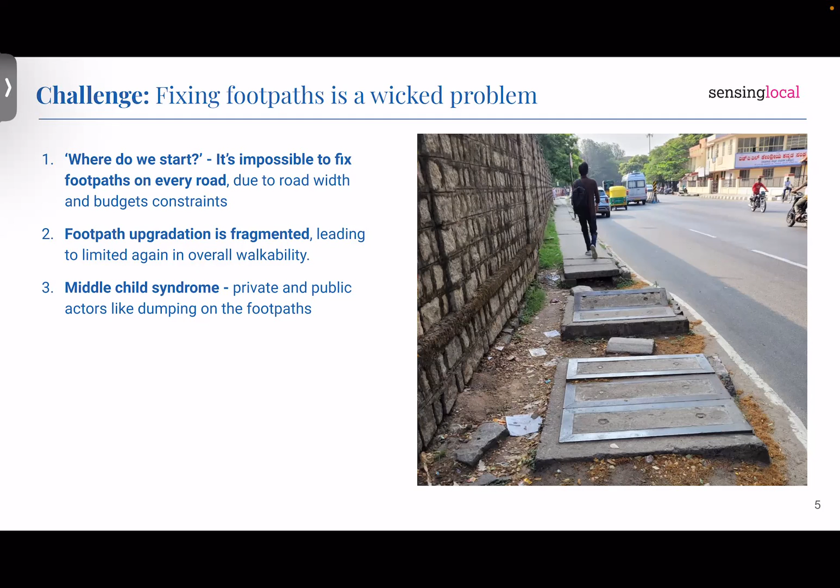So it inevitably isn't anybody's responsibility in that aspect, even though it is public infrastructure.

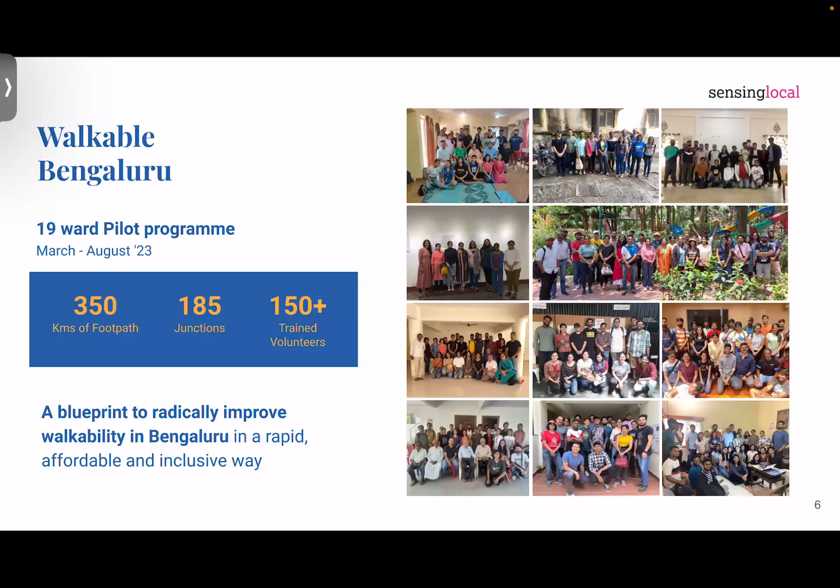Walkable Bengaluru was actually a pilot program. The reason we pushed this forward is that we wanted to cover at least 19 to 20 wards roughly. It was completely community driven, and we did these audits every weekend with a whole set of volunteers. We covered around 350 kilometers of footpaths, 185 junctions, and around 150 plus volunteers who were trained to do the audits. From there we got a very interesting blueprint on how walkability can be achieved, and that's what I will take you guys through.

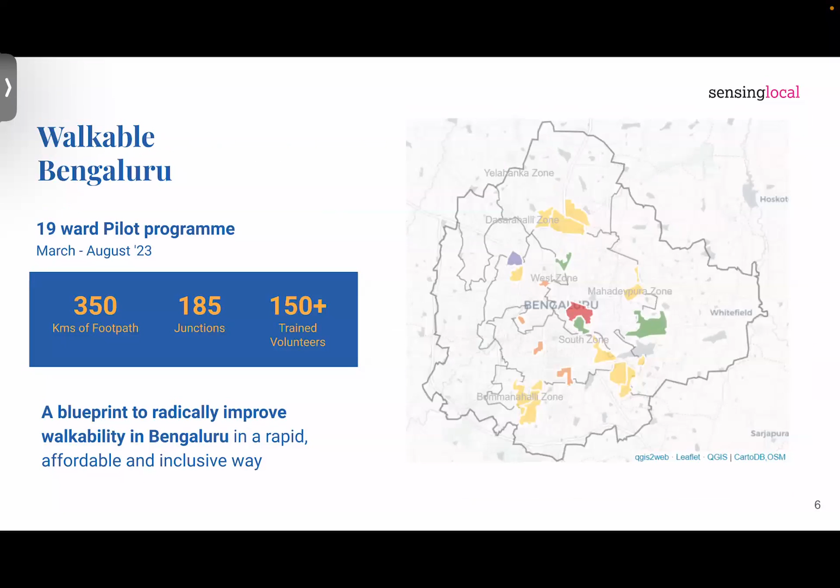So this was roughly the distribution of the wards. We took a combination of commercial, residential, inner wards, outer wards, and we also looked at industrial wards. So there was a good sample set that we looked into, to see if there was anything underlying in all of these wards together.

Our components of this audit followed a strategic approach. We first identified what we call a priority walking network, which means that if a ward has 30 kilometers, we're saying don't fix all 30. Most people will be using maybe 15 kilometers out of that for walking, so we'll focus on that 15. And even in that 15, probably a percentage will already be in good condition that we don't have to touch. But the one that's in bad condition is what we want to go and audit.

We also did comprehensive audits. We looked at a simple form, but covering multiple parameters, which also provides high accuracy and high ownership of a particular issue that we are capturing.

We also then use this data to generate budgets. We did budgets according to the SOR, our schedule of rates here in Bangalore. So immediately after I collect the data, it goes through our tool, and then it gives you the budget on how much money is required to solve for, or improve, that particular footpath.

The final thing we did is we used this data to create local projects. So whether we look at pedestrian streets or public space development along the way, all of these are things that we looked at in terms of local projects.

The key factors of this particular study: it took around 4 hours for one ward to do the audit and generate the budget. It was usable by citizen volunteers and government officials alike. And what we have is ready for planning - basically the data is ready for planning and budgeting.

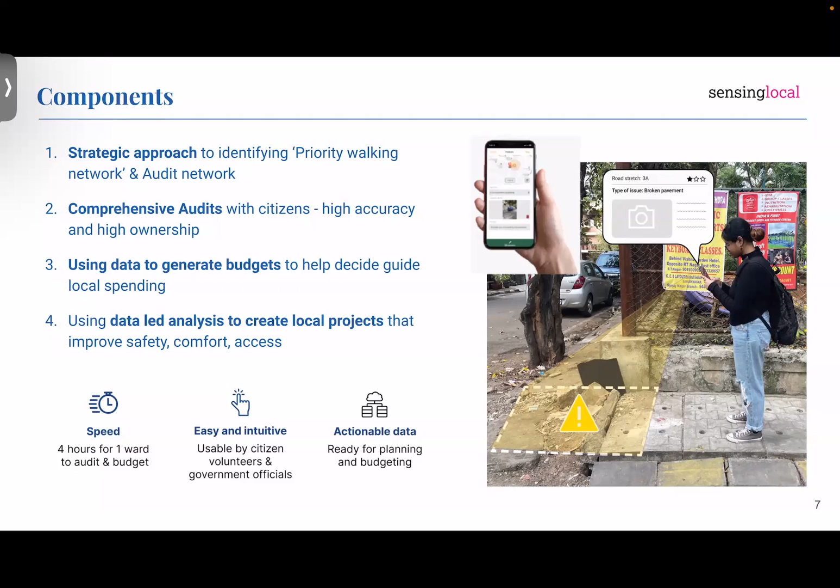So this is an example of one of the wards, where 26% of the road network that exists in this particular ward is the priority walking network, of which we audited just 15%, which we thought were in bad condition.

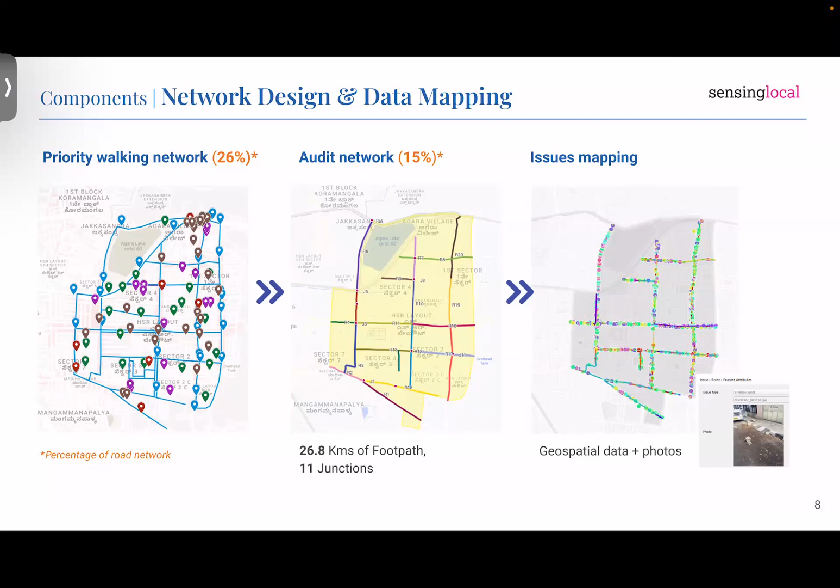And then we go about mapping these issues - to every point that was collected, point or line, there was an image mapped to it, as well as a few attributes. The issues we collected range from footpath quality, waste, encroachment, obstruction, unsafe areas, and junctions as well. We had 7 parameters we looked at: infrastructure, and on-ground experience of safety. So overarchingly, we had multiple parameters that we looked at.

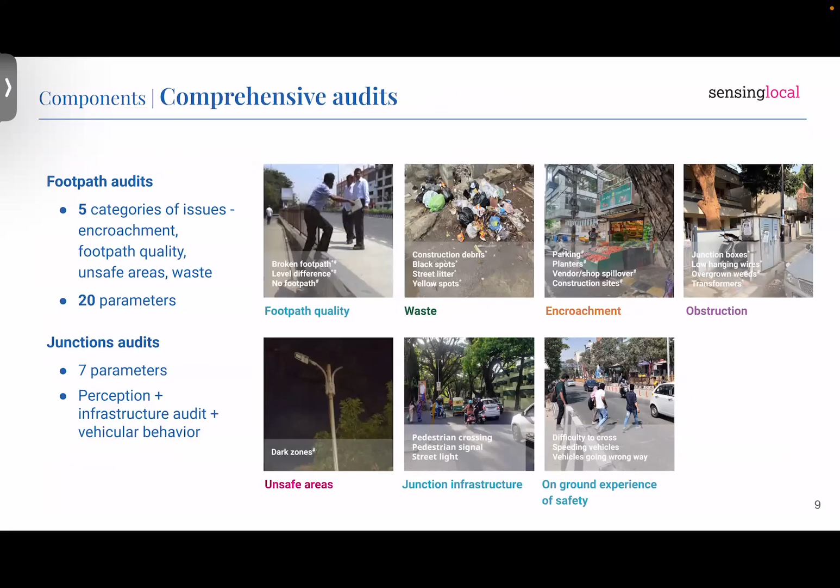And one of those - what we're talking about - is a deep dive into encroachment, and from within encroachment into parking. That's what we'll be focusing on in today's discussion.

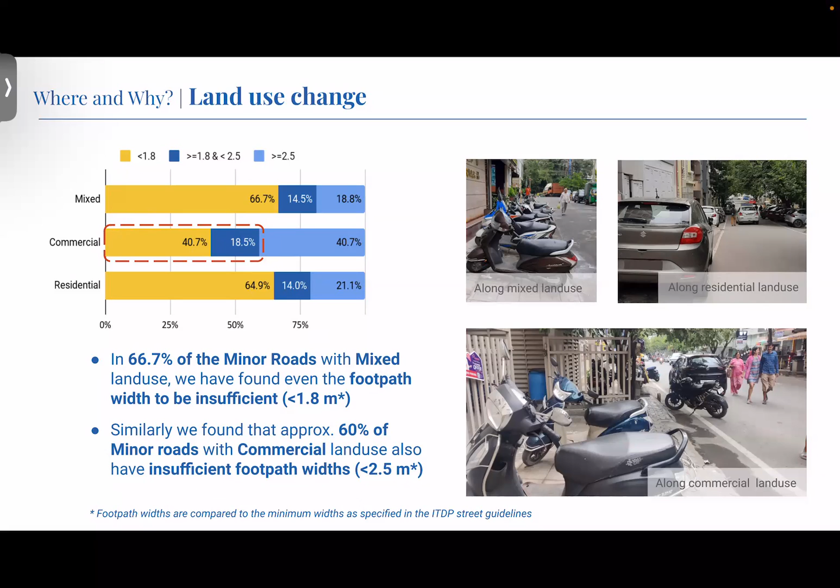In commercial areas, the norm we work with is 2.5 meters. In commercial areas too, we notice that 60% of roads with commercial land use within minor roads also have insufficient footpath width - they don't even have that 2.5 meter width. So we are already struggling, in a fight between pedestrian infrastructure and parking infrastructure. But the land use does attract a lot of these activities, which actually needs parking to be there.

The next deep dive we did is we looked at multiple trip attractors and the component of temporal parking. We realized that a lot of the encroachment from parking is because of religious institutions, educational institutions, and obviously commercial activity that exists.

At this moment, I'd like to bring attention to religious and educational institutions. The reason is that in both, we find minor roads form a very large category, but the important aspect is that both parking and footfall are temporary and time sensitive.

So the moment it's school timing, it becomes a chock-a-block area, or it's a particular timing for a festival, or temple timing, or prayer timing for the mosque - it definitely becomes clogged up. This is something we've noticed as well.

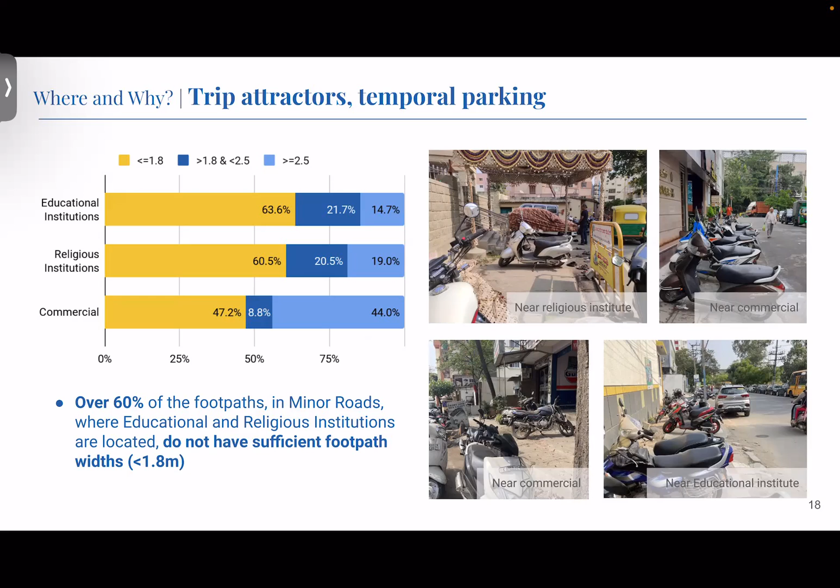So what results when you have certain kinds of trip attractors, again majority on minor roads, is that 60% of footpaths in these minor roads do not have sufficient footpath width - not even within the 1.8 meter width that we require for the footpath. These images are indicative of exactly that.

I'll leave us with these questions and let it dwell on what we're thinking about. As we go into the presentations, I think this is to the speakers - if there's some correlation already there, it would be great if you could point it out, but we'll discuss these at the end of the presentations.

So one of the first questions we're trying to place and investigate is that a lot of roads that attract parking are linked to trip attractors, largely located on minor roads with insufficient width. In such cases, how does one negotiate parking? The second is when reorganization of space does occur on a particular street, especially when you come into area level parking plans...

How does pedestrian infrastructure weigh in terms of priority to allocating space for parking? Is it evaluated? Is it not considered? Is it ignored? Is it taken into your total calculation, saying okay, I will readjust pedestrian infrastructure and then go about doing the rest?

How can temporal parking be addressed? That's another question our data has thrown out.

And finally, and I think this comes more from a Bangalore perspective, because we do not have a master plan - city mobility plans to some extent, but they don't cover parking entirely - so what then becomes the role of a parking policy?

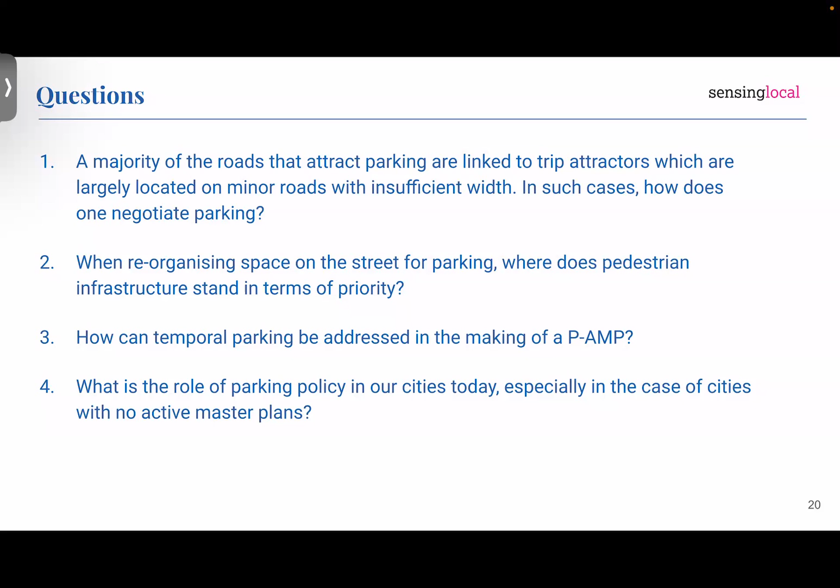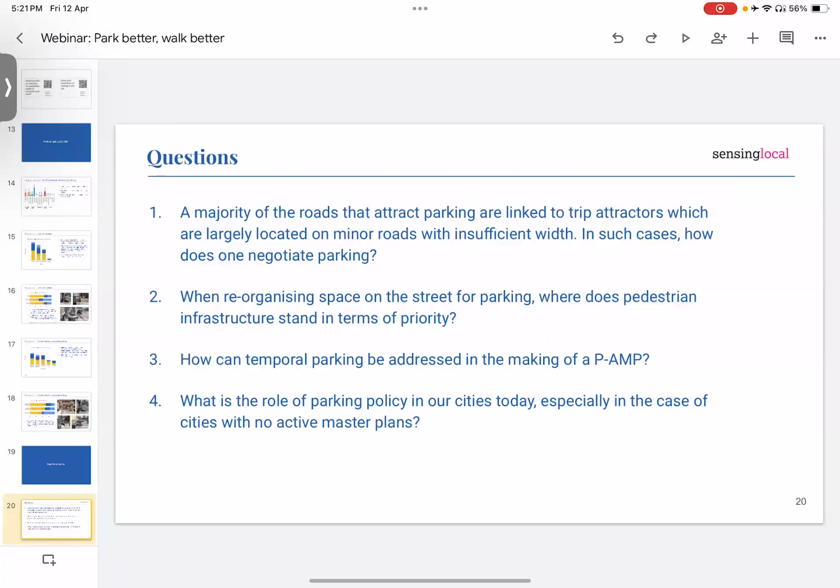So I would bring in our first presentation. And just for us all to understand, the way we've lined up these presentations is that we will first look at Urban Lab, because it's largely around parking policy, master plans, and how you look at it from the top-down perspective.

The Racecourse Neighbourhood Coimbatore is a project led by the government, really pushing to be able to do an exercise like this at an area level. What is being covered by CSE and Sonal is looking at a community-driven approach towards area level parking management plans. So the structuring also comes from a perspective of scale and who's leading and deriving this.

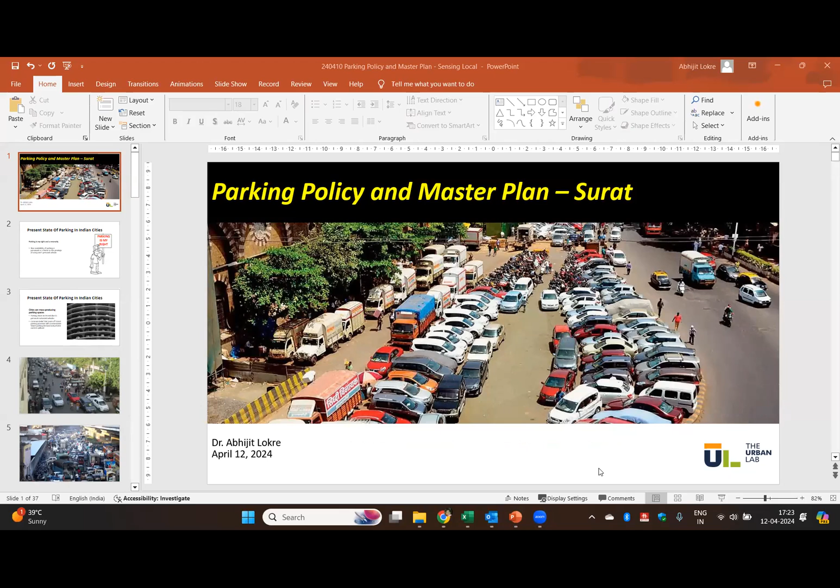We can see your screen, no? Yeah, even in the presentation mode, we were able to see it. Okay, so am I visible and am I audible? Both - yes, you're visible very much and audible both.

So yeah, thanks for inviting me first of all. And I think it was a very interesting perspective you brought on Bangalore. It got me thinking actually, because I've never thought of parking and relating it directly to master plans. That's a new perspective for me.

And I was thinking, even as you presented, whether really a city with a master plan - let's forget a good and bad master plan, but a city with a master plan - does it have better parking practices? Or does it have better parking practices that lead to better walkability? I thought about it and figured out not really. I know Bangalore is really suffering in its planning because of how planning happens. I do some work in Bangalore and I know how bad planning is.

How new roads are carved out, how land uses come up has absolutely no logical basis. I come from Gujarat, where development plans are prepared every 10 years, and there are town planning schemes at level 2. Gujarat actually promotes a lot of mixed land use, but the parking problem is as bad as Bangalore. It still exists, I don't see any difference.

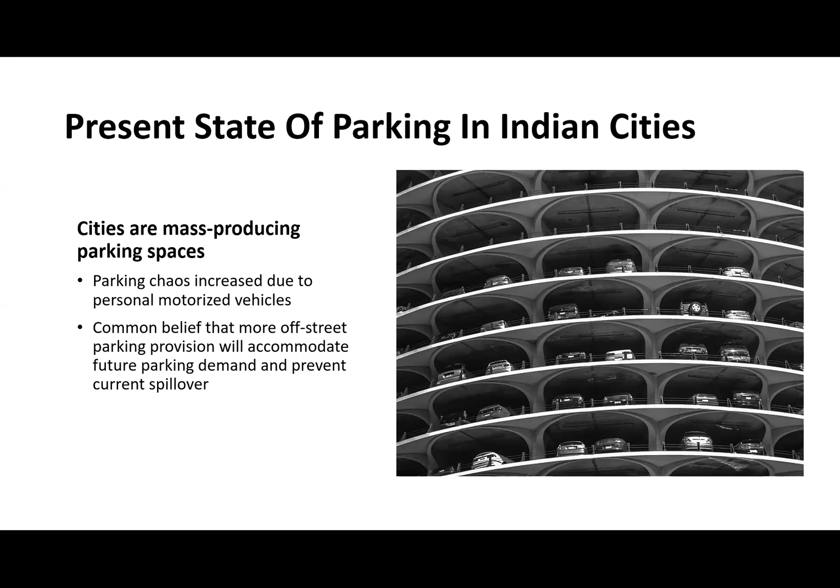Surat actually has a lot of parking provided by the municipal corporation. They also have 11 multi-level car parks, which are managed quite well by Surat and built quite well. But still, the Surat Municipal Corporation believes it's their duty to provide parking. In fact, in 2016, when we were asked to prepare the parking policy, the corporation's belief was that we should tell them how much more parking they need to provide — what the gap is in supply and demand, so they could start providing more.

We had done some studies comparing Indian cities, looking at the percentage of habitable place where people stay versus parking area. In Indian cities, we provide a lot of parking, and this comes through parking minimums. The development control regulations say you have to provide at least so much parking, you cannot provide anything less than that. And the parking minimums have been rising every time the development plan gets revised.

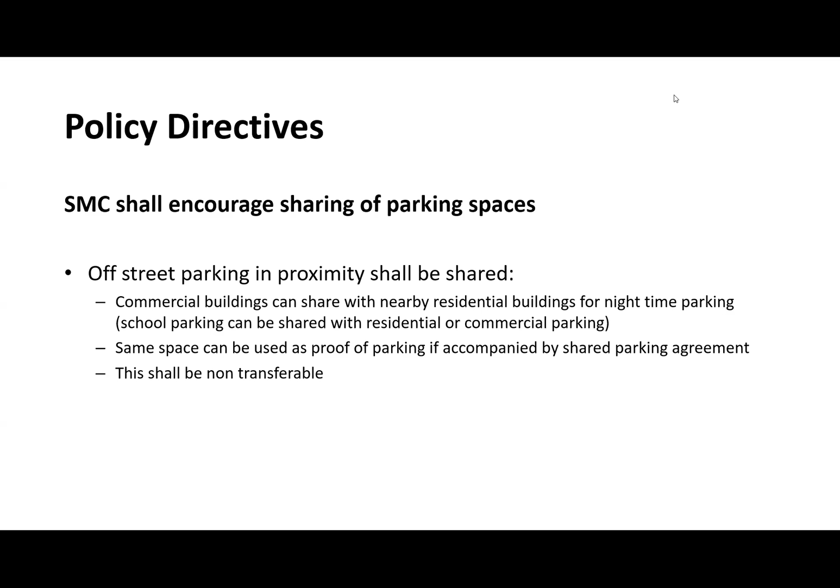Parking permits was something that also came up, where you carved up Surat Municipal Corporation into parking districts, where you could purchase parking permits either for 6 months or annually. These were offered at subsidized rates compared to the hourly parking rates.

Another innovation, very strongly recommended by the municipal commissioner in Surat: can you link your insurance premiums to parking violations? So if you violate any parking policy directive, your premium will be increased. Again, this has not happened because they would have had to negotiate with insurance companies about this. So it remains as a directive in the policy, but not really implemented. But I believe this is something that can be looked at.

Now, Surat has a master plan, which you were talking about earlier, but I don't think the master plan actually had any influence on whether parking is better or not, or what is happening around parking, because I think parking is linked to many other factors—for example, the availability of public transport, the parking charges themselves, and any other transport demand management measures.

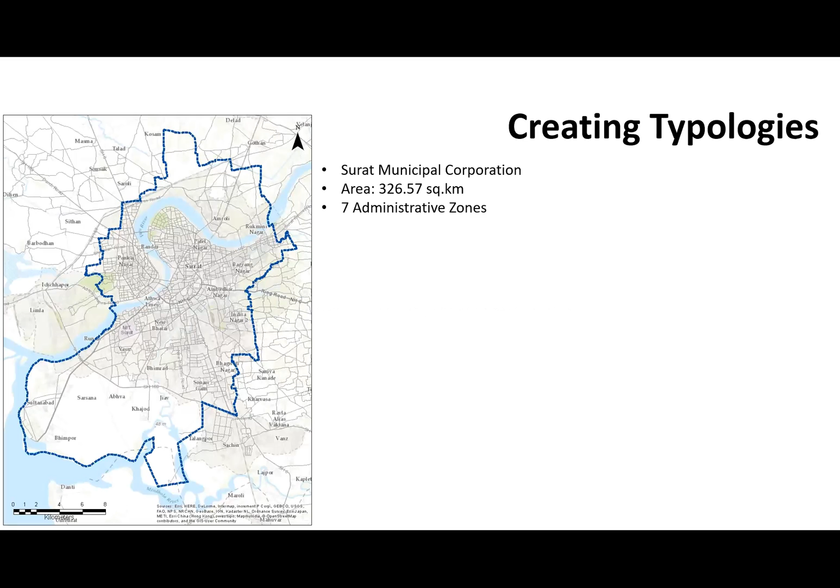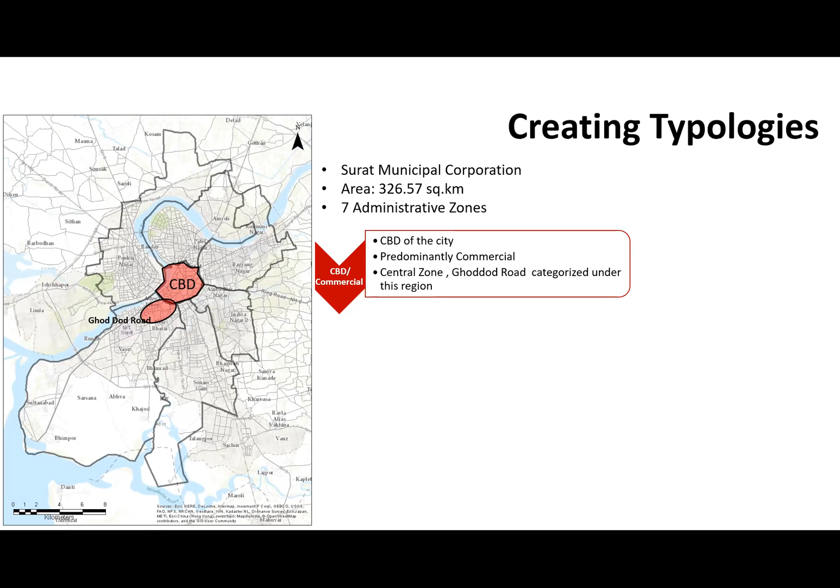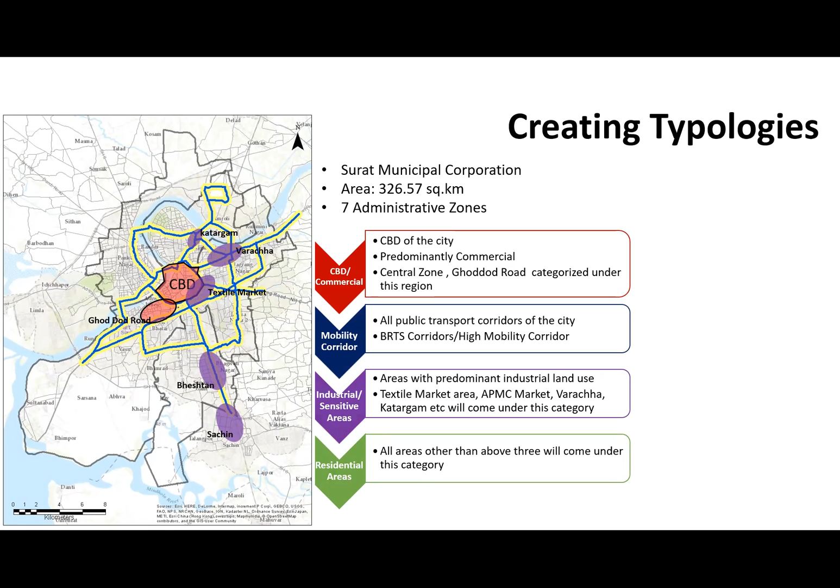What Surat Municipal Corporation was very clear about was that they wanted a parking master plan done by consultants. What the consultants, UMTC, came out with at that time was not a very comprehensive master plan—they said okay, we'll divide up the city into some areas. There is a CBD, the old city of Surat in the center, and a certain road that takes off from the CBD called Ghod Dod Road, so that becomes part of the CBD. Then all the BRT corridors and high mobility corridors come under the mobility corridor. Then you have industrial areas, and everything else came under residential areas.

So that is how the master plan for parking was done, with these 4 clear areas. For each area, there were very clear-cut strategies. For example, for the high mobility corridor around the railway station, there was some basic counting and surveys done to understand the supply, and based on that the gap was found, with some suggestions given for what the supply could be. This was not a very detailed master plan, and it did not really work in Surat.

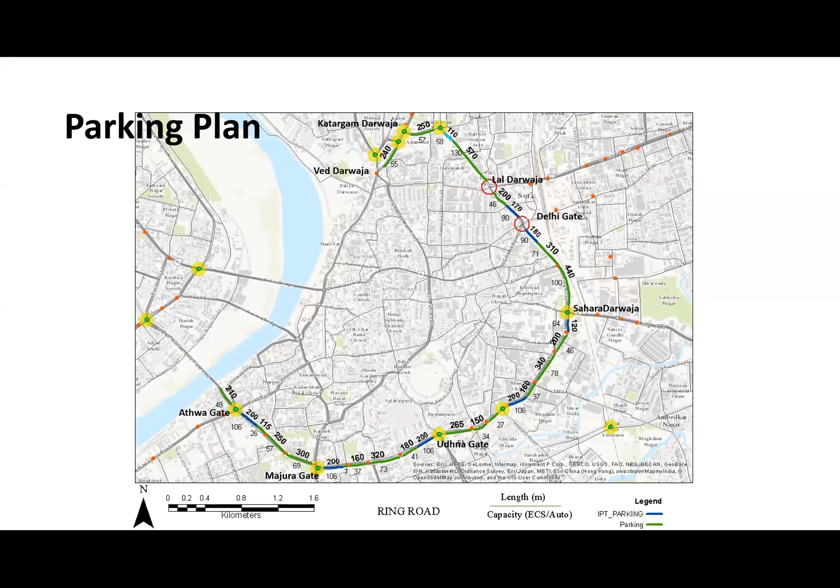I was fortunate enough to work over the next 2-3 years—I think in 2018 and 19, I worked with CEPT University on preparing a master plan for Bhubaneswar. I think Sonal's presentation will also talk about area master plans, so I'll skim through this quickly. What was very important in Bhubaneswar was how they linked the area master plan to the plans and policies—it started with the comprehensive development plan, linked to the draft parking policy, and under that they came up with their area master plan.

What needs to be done when you do a master plan? You need to figure out what is the supply infrastructure, what is the demand, what are the current practices, how is it enforced, what is the NMT and pedestrian infrastructure—very critical, especially given today's context about walkability—and who is going to enforce the institutional aspect.

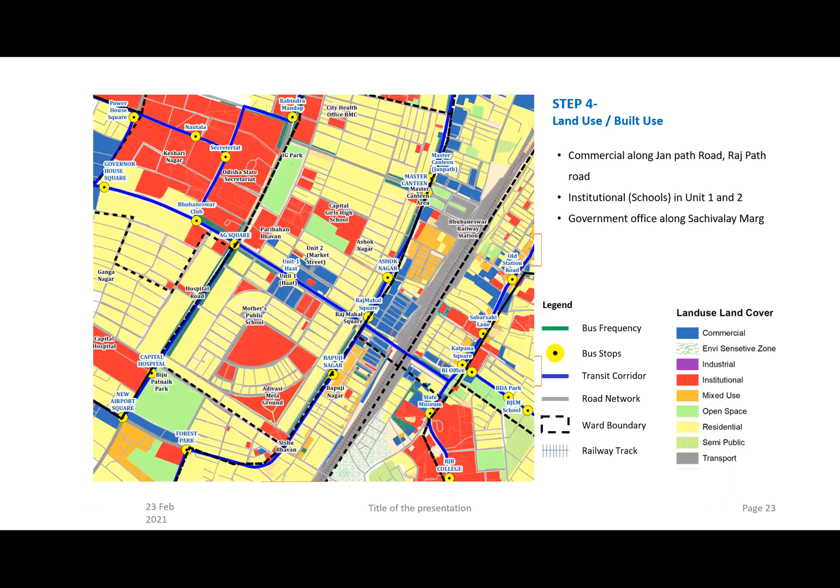So a few slides quickly on how do you demarcate areas, how do you actually proceed. This is a small insight into what Bhubaneswar did; the actual work is much larger than this. You find out what is the transit network, look at the land use, and then come up with your area boundary.

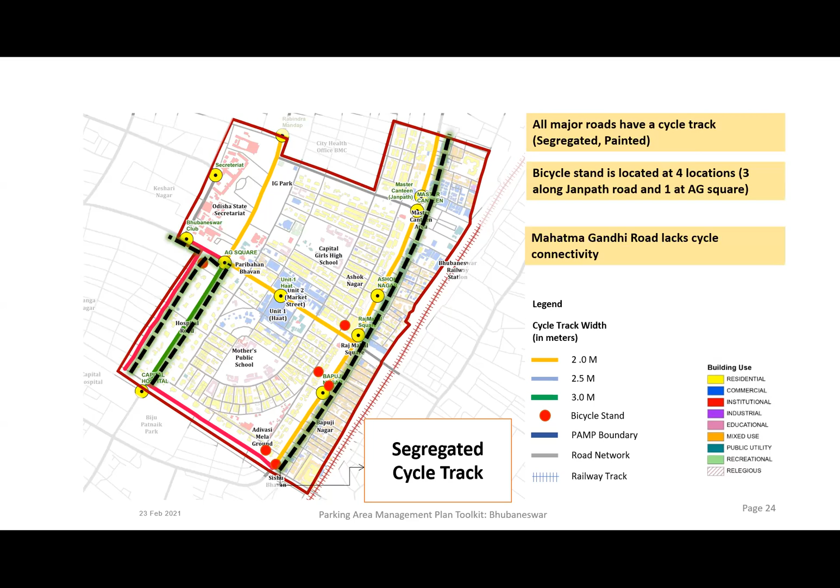Based on that, you look at your bus routes, your cycle routes, where are the segregated cycle tracks coming, where are the markets coming. This is all baseline analysis that needs to be done. Where are the public bicycle stands located? Where are the parking lots located?

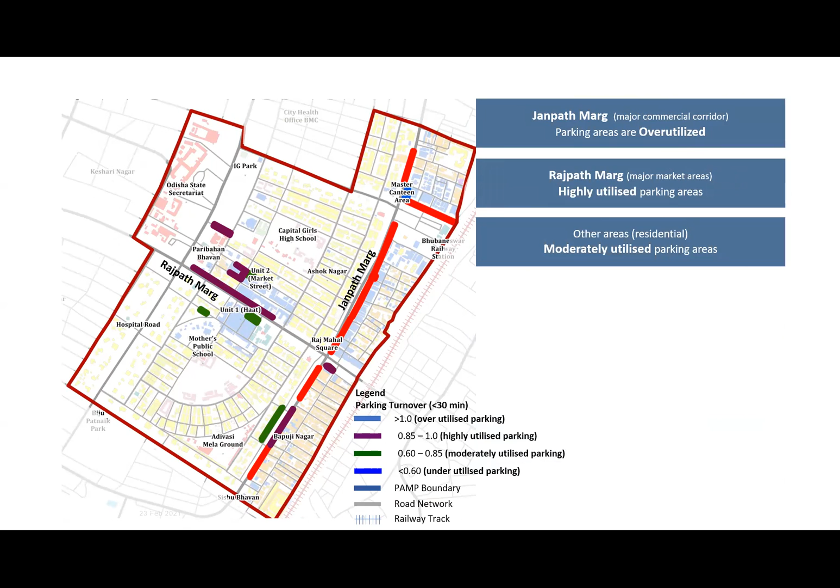You do all this baseline work, and a lot of surveys to understand the parking turnover, the utilization, the index, and so on. You figure out which areas are overutilized, which are underutilized, which are utilized only during certain times of the day, and so on. You also find out what is the average parking duration.

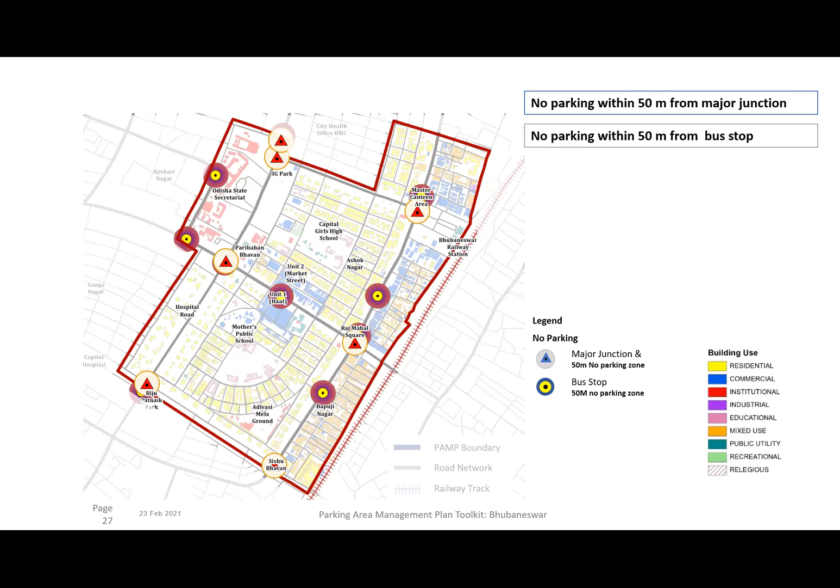And then you come out with certain strategies. You say, okay, no parking within 50 meters from major junctions. So you mark that out: 50 meters from transit, 200 meters from any existing multi-level car parking.

Then, because there may be certain administrative reasons, no parking on the Sachivalay and Rajpath Road. You identify where you can pay and park with high charges, because these are transit corridors, and where parking is permitted near schools and colleges. It certainly helped that Bhubaneswar has a very clear master plan.

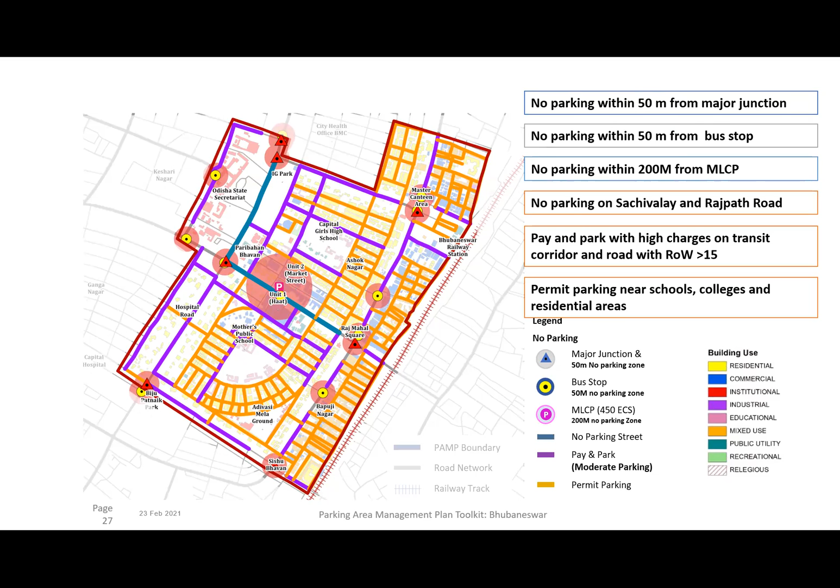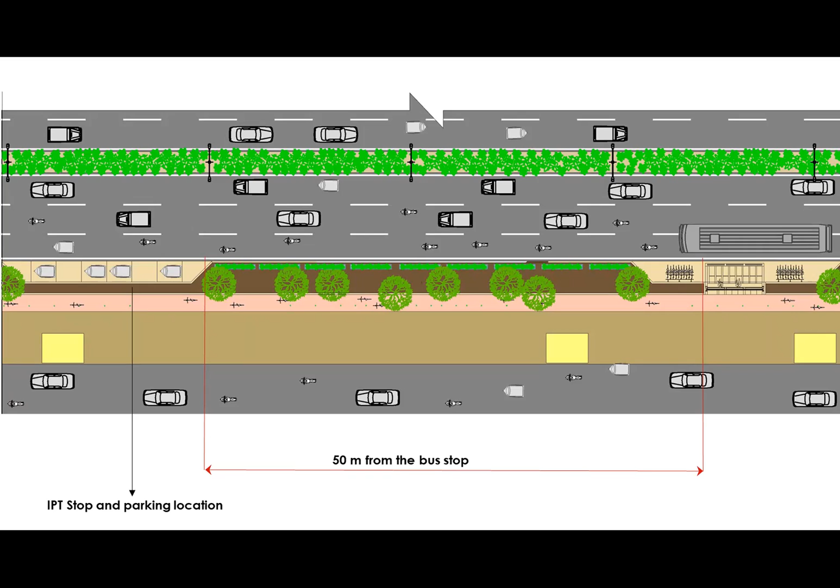And then you get down into details like this: how should the design be, where is the cycle track, how much is the footpath, and so on. So at the end, you come out with templates like this for each and every street in the master plan area, and you develop sections for each one of them.

This is what Bhubaneswar did for two pilot areas initially. One was what I had shared, the other was near an institutional area. Then they looked at how to fund this through municipal budgets, through councillors, through public-private partnerships, through creation of an urban transport fund, and who would be responsible. They had proposed a UMTA, but it's still not there.

The municipal corporation was responsible for implementation. The BDA was responsible for guidelines. The smart city was responsible for providing technology solutions, and enforcement went with the traffic police.

I'll end with a few insights from some other work we had done in Surat a couple of years back, and this is where it comes to behavior. Somehow in parking, we are very reluctant to target behavior and use parking prices to do so. We had done some other work with Urban Works Institute on seeing how parking itself can become a private business, and as part of that work, we had done some surveys.

What we found is that when the rate per hour for cars becomes 40 rupees per hour, you still have 55% of people willing to pay that. As the rate goes up to 80 rupees per hour, you still have 38% willing to pay. You can look at it in two ways.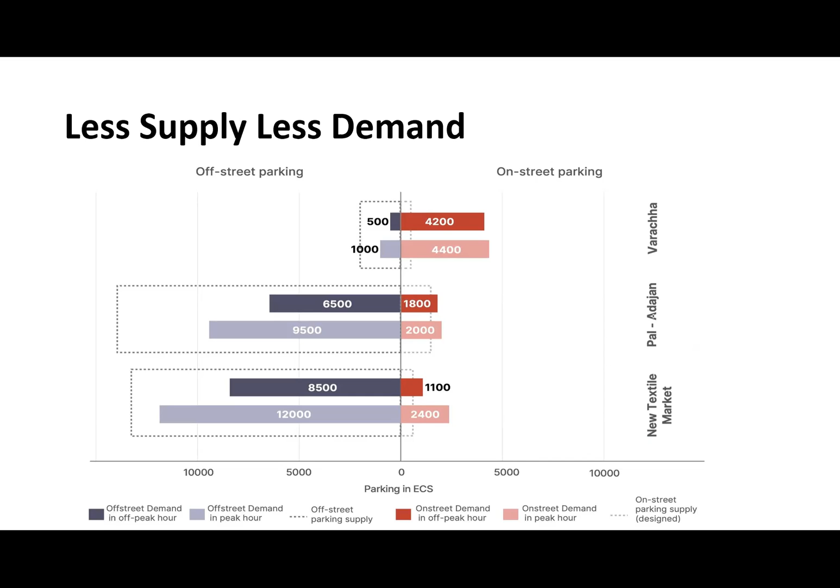If you look at Pal Adajan and new textile market, you will see that as the supply has increased, the demand has also increased. So there is a direct correlation between these two. Somehow we believe that increasing supply will be able to manage the demand. It doesn't work. Increasing the supply also starts increasing the demand, because parking supply is like a magnet. It creates its own demand. That is something that came out very clearly. Less supply, less demand, more supply, more demand.

And the last one, we looked at what is the willingness to pay in areas with limited parking. So in Varachha and new textile market, where parking was very limited, people are willing to pay more, which means there is a substantial market for private enterprise to get into the business of providing parking.

This is something that was done as part of research for Shakti Foundation. I believe the report will be out soon. It's an interesting study which you could look at. I'll end with this.

So if we see the parking challenges in Indian cities, we heard many points from Mr. Abhijit. One point I would like to start with is that parking, when we see it, it's not about the space, it's not about the management. The first thing we have to connect is that it has a strong relation with travel behavior, because he mentioned it as a socioeconomic activity. Yes, because the first question you think is, do we get a parking space over there? Then I take a car. So it is very much strongly correlated with the travel behavior. And city to city, we can see this variation as the land use changes, as the socioeconomic factors change. This travel behavior and its strong correlation with parking keeps on changing. This is one thing we should keep in mind. And what we see in Indian cities, especially today's core issue, is about linking parking and walking.

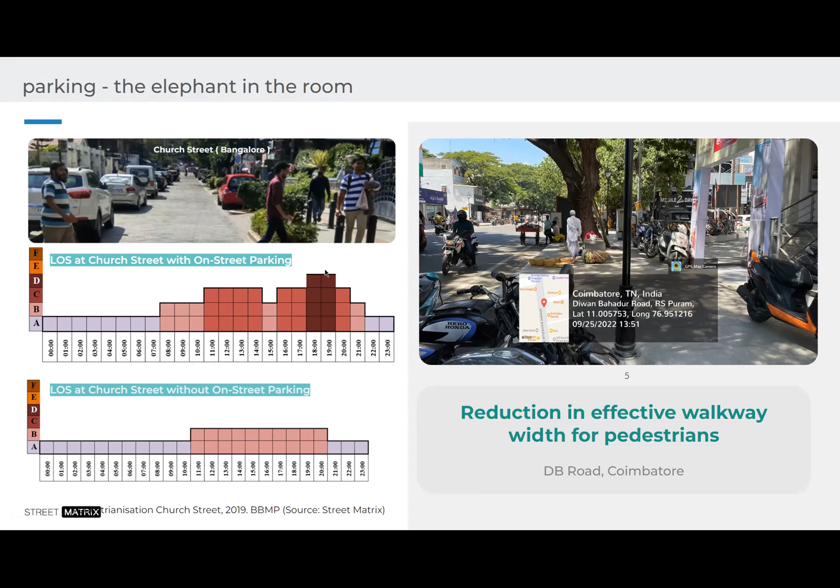We have done some research to understand how serious this parking issue is for infrastructure. The two charts show one with on-street parking and one without. We can see it going from level of service B up to level of service C and D. So parking is the one element literally reducing the service level, and that makes people come out with protest and demand space for walking.

So how do we solve it? We have seen different approaches, a couple of points which Mr. Abhijit already mentioned, but I'm just compiling it. As he said, the conventional approach is wherever there's more demand, providing supply there, the conventional way of considering multi-level car parking.

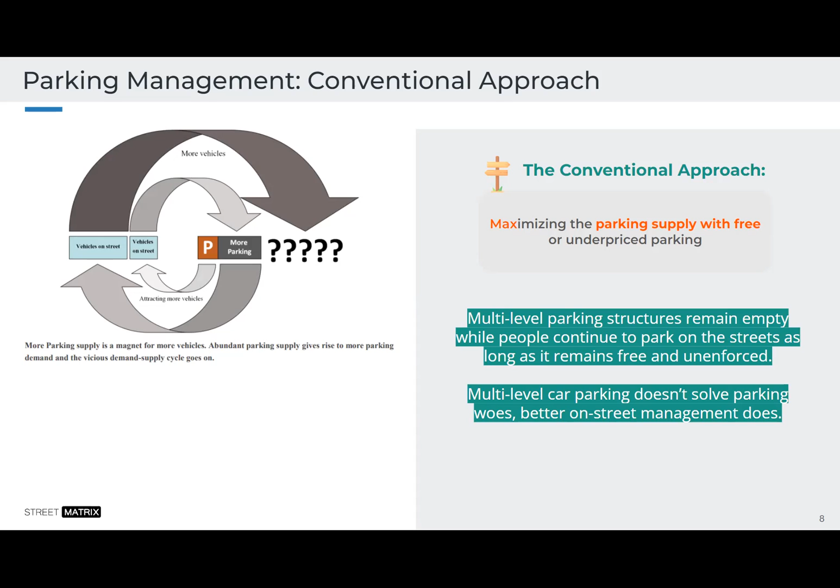That is not the right way of doing parking management, because we have seen even in MLCP how efficient it is, how much occupancy it has. You won't even believe it when we surveyed a couple of multi-level car parkings in Coimbatore city, the parking occupancy was seen quite low, as low as 10 to 15%.

That is with this huge infrastructure cost, and finally its operations stand out as a problem. We have another approach recently incorporated into street design templates, where parking is taken as one of the street design parameters. But the question is, are we actually understanding this street element of parking as a space, or in terms of its activity behavior? What we observed is that most of the time parking plans have been retrofitted into design templates, not integrated into mobility plans.

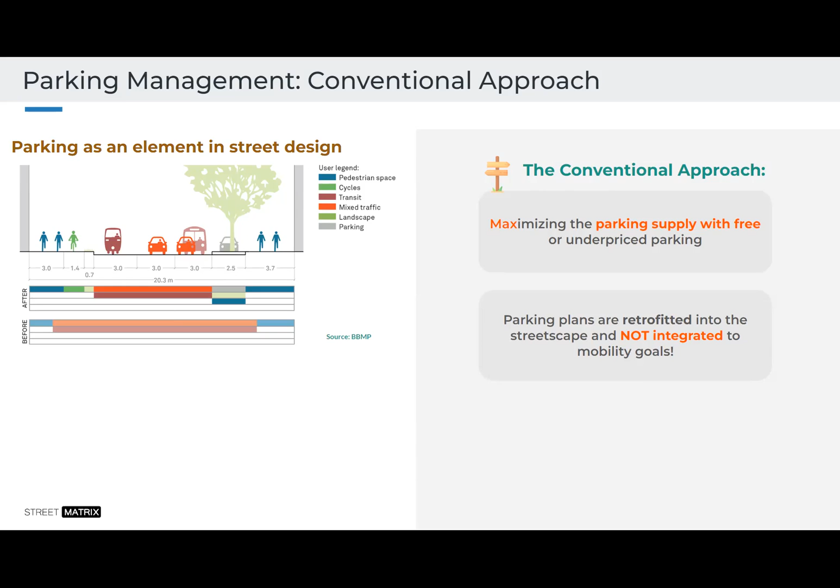So what do I mean by this? I have more evidence from Bangalore to showcase it, because I've been working with these street design templates for quite a long time. I'm showing you one of the street designs from Bangalore.

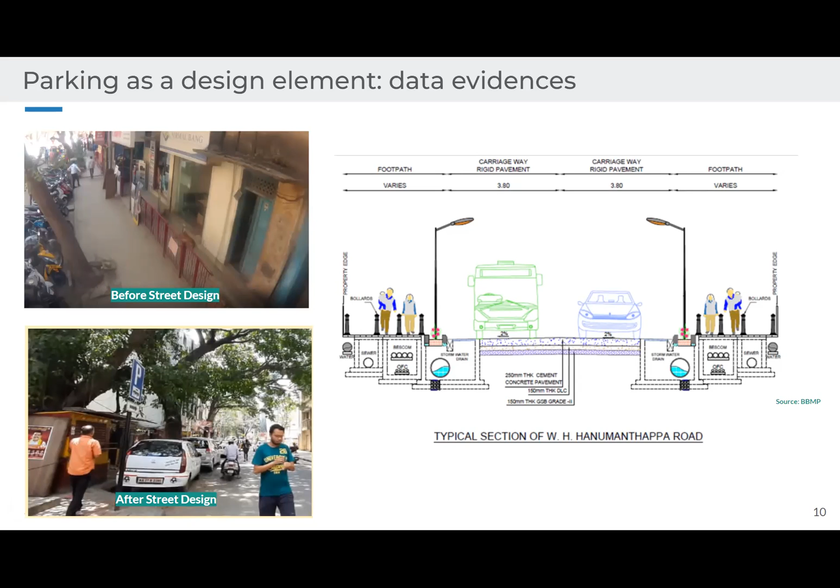Before the street design, you can see the sidewalk, and a series of parking. But even after the street design, if you look at the parking bay, you can actually see the constraint in the walkway space kept for pedestrians. It's not just about treating parking as a bay to be provided of 2.5 meter width. This is more of a design practice that's been followed, but that doesn't even ensure good walking comfort and walkability.

In the particular case shown here, without that street design, you can see how much the street was utilized in terms of vehicles, two-wheelers and cars, a large number for one day. That was reduced a lot, in fact by 70 to 80%, when the redesign was done. But again, the utilization or management of the space was still a problem occurring.

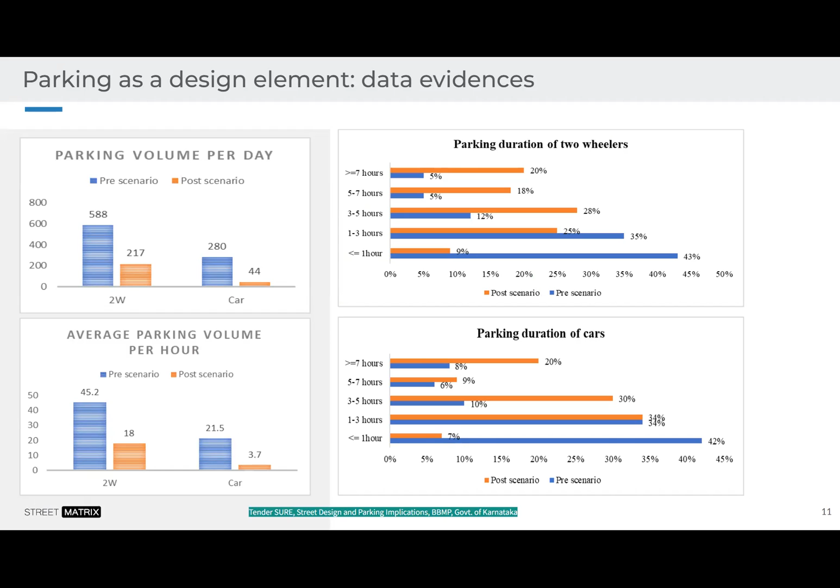Again, the lack of right design, not understanding the parking requirements for the area, and neglecting even the pedestrian walkways and space was another concern. And this is still the problem cities are facing now.

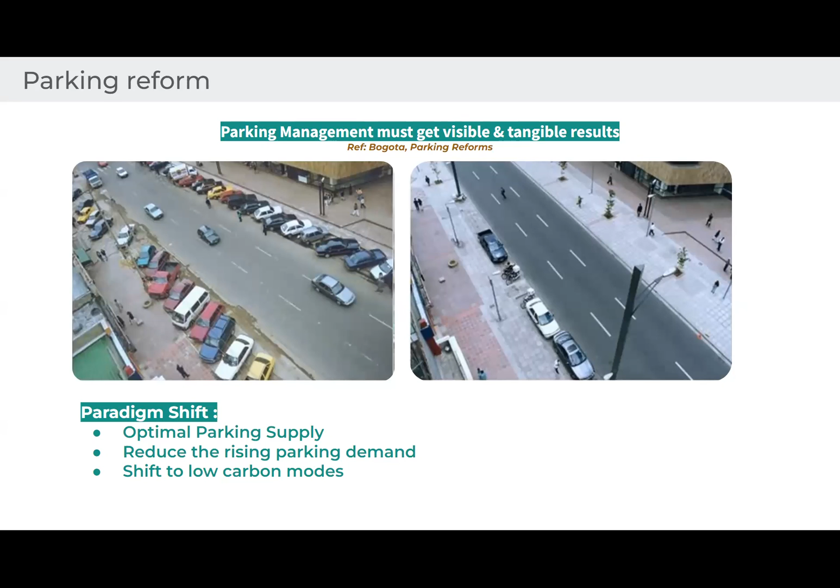Now we have examples from global practices which tell us how the reforms have to be taken care of. It's not the conventional practices that really help us solve it, but we should go ahead with parking reform. Our ultimate goal should be a paradigm shift where cities don't increase supply, but optimize parking supply and reduce demand. These are things we should look at to address this problem, and finally shift towards public transport or low carbon modes.

That's all I would like to say on that.

What cities are practicing now is seeing the ultimate aim as behavioral change towards sustainable modes. Moving from on-street to off-street parking is the agenda for us. How we do parking management to achieve this agenda is the steps we have to think about. Keeping the basic principles: provide on-street parking, but price that space, and even keep prices higher than off-street parking. Always understand the dynamics of demand, monitor it, and slowly nudge behavior to shift to public off-street parking. This is the stage in which we have to work.

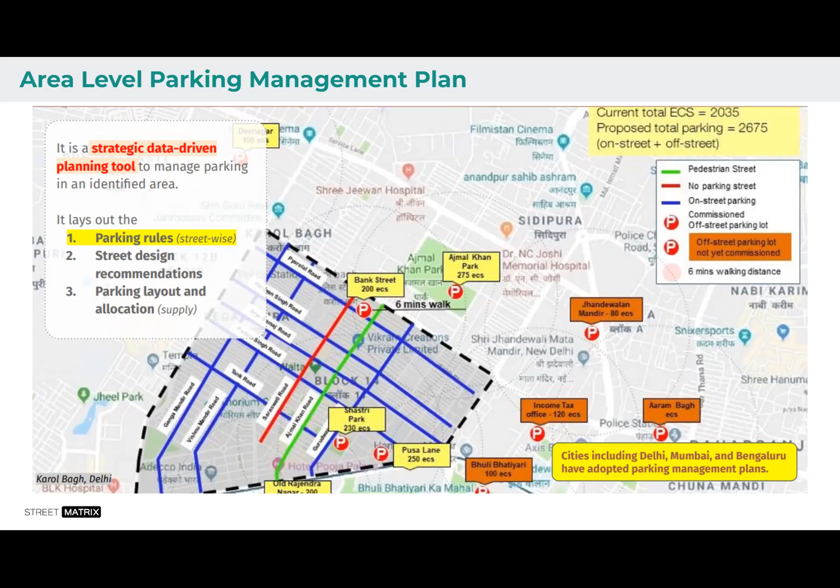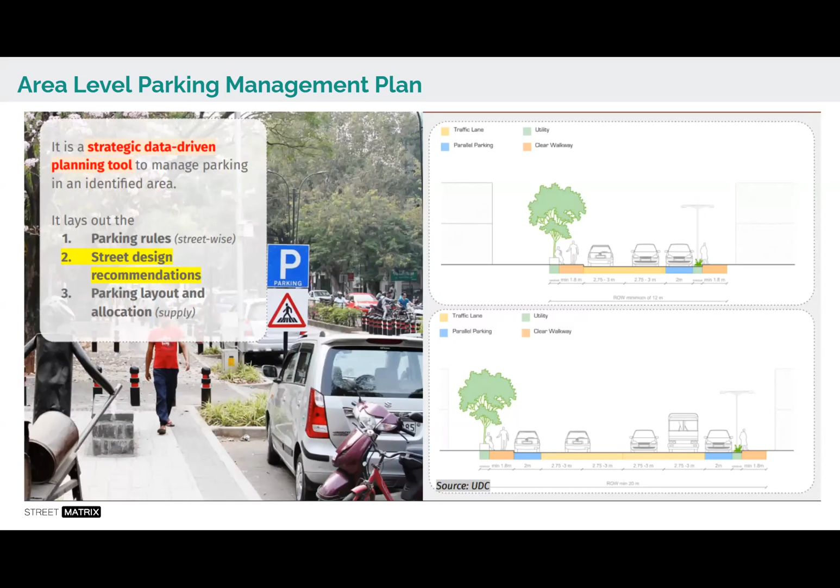In your area, not all streets have the same demand, or demand for the same things, or the capability of accommodating parking. So identifying the street hierarchy, establishing it with mobility in mind, determining where parking can be given and where it should not, these are the baselines which help narrow down a plan to effectively accommodate and utilize the space. This is the core of the area management plan.

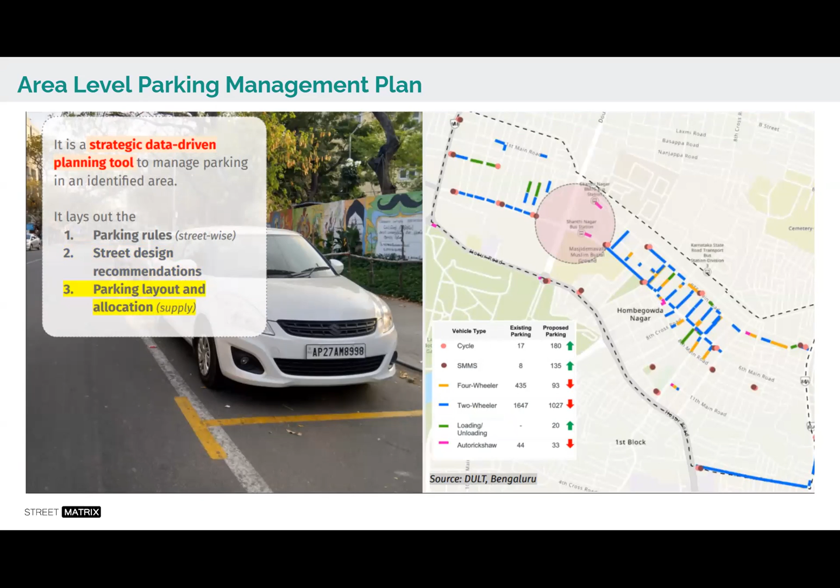I'm showing you one area plan where we can see how it works as integrated mobility. It's not just for two-wheelers or cars; we have cycle stands, shared mobility, auto rickshaw, and loading-unloading zones. All these are important activities for a resident or neighborhood. Understanding that neighborhood is the base on which area level plans are built.

This is a data-driven decision-making tool where parking rules and definitions come out, and then we move forward with implementation.

So here I'm going to show the parking management action plan for the Coimbatore neighborhood. The city officials of Coimbatore.

Reashma, just checking on time. So you can wrap it up in 5 minutes, is that possible? Yeah, sure.

Okay, done. So here I took more time explaining the baseline, because that's the approach in which an area parking management action plan has been working on.

So when we met the officials in Coimbatore, they had this issue of wanting to address parking in two of the neighborhoods, taking up the area-level parking management action plan. One of the roads given to us was Racecourse, that is the first one. You can see it, Racecourse is a beautifully built-up area which has prioritized walking and cycling.

When you see these photographs, you can see how good this space is. But in reality, the space has turned into this kind of situation, even affecting the walking.

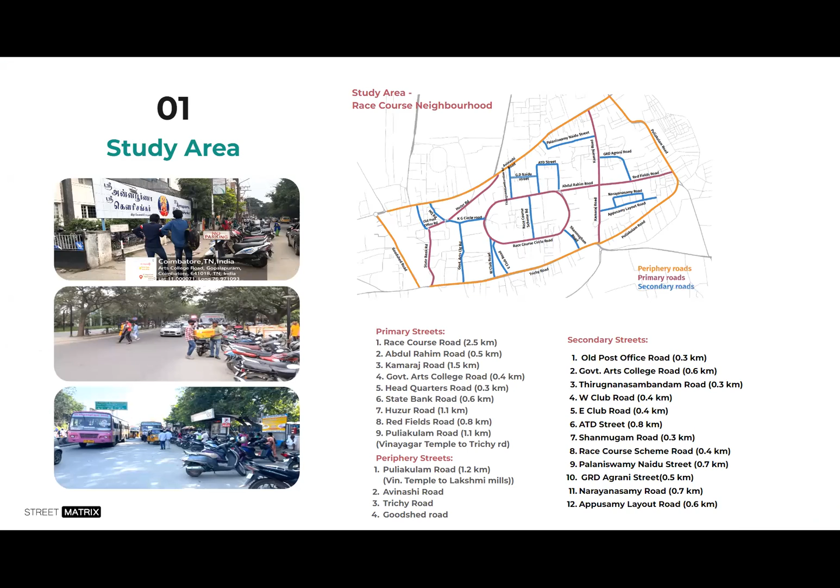Affecting more crossing of people, movement of vehicles, just because of the haphazard parking. So our approach was the same as what I explained so far. We identified the street network, we had a review of the entire area. You can see how the vehicle ownership, as the city has seen increase, has affected this kind of issue, parking chaos.

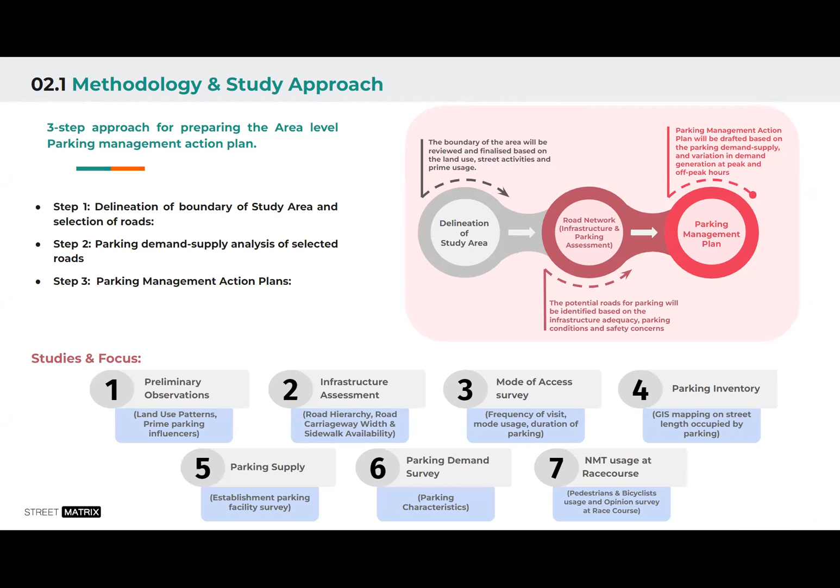So we took an approach to understand all these points of land use, street hierarchy, how the parking is right now, the demand and supply correlation. And then based on that, we took the steps. So all these are our survey studies, it was a detailed data-driven approach.

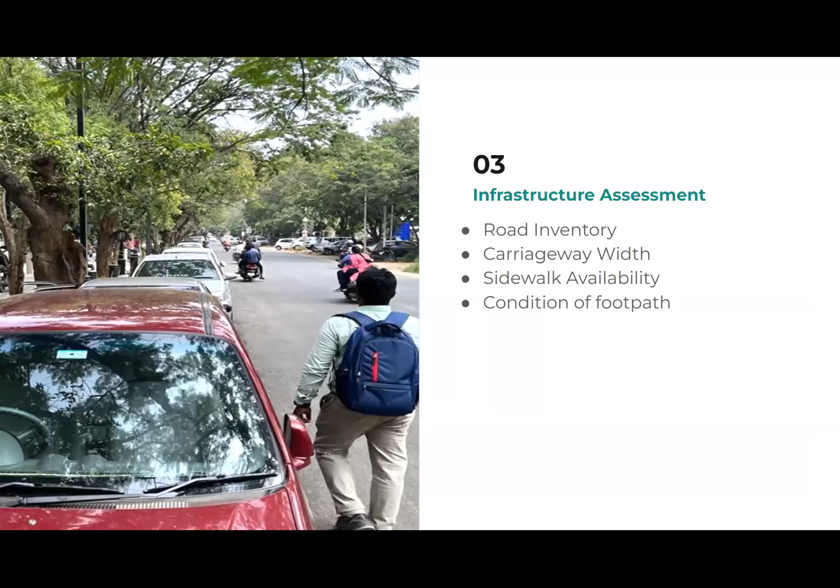We emphasized a lot more on understanding from the neighborhood level. I'm showing you here how the street network has been defined. If you see the infrastructure assessment, you can see how it varies. The right of way of the roads were not uniform, the infrastructure was not in proper place. You can even see 2-meter sidewalks in some places.

There was no sidewalk in some places, it was even reduced to 1 meter. So we told the officials, and we were happy that officials were understanding that this should not be treated just as a parking management plan. It should be a mobility plan supported with parking management, and that is the benchmark we set there.

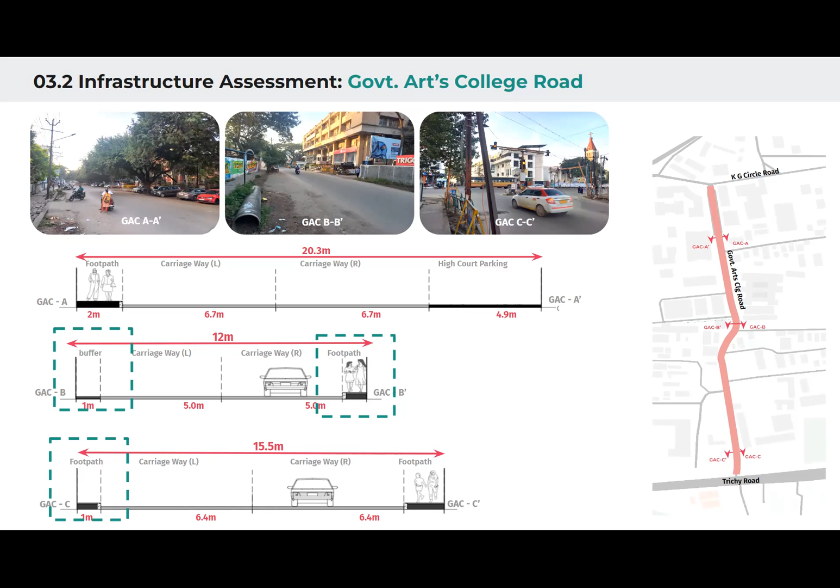We identified the current footpath conditions, walkability. You can see the visual image here in which the broken lines indicate that these are not even having good walkable conditions. So we said, prioritize your sidewalks.

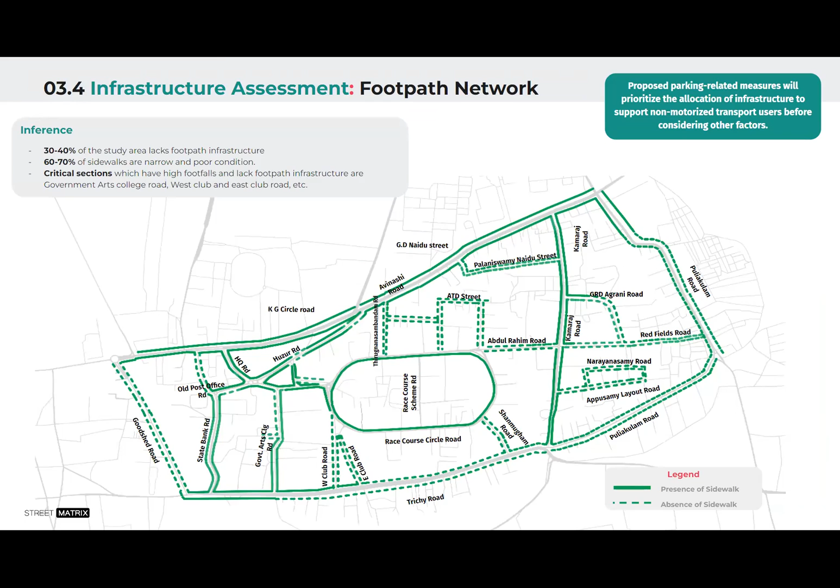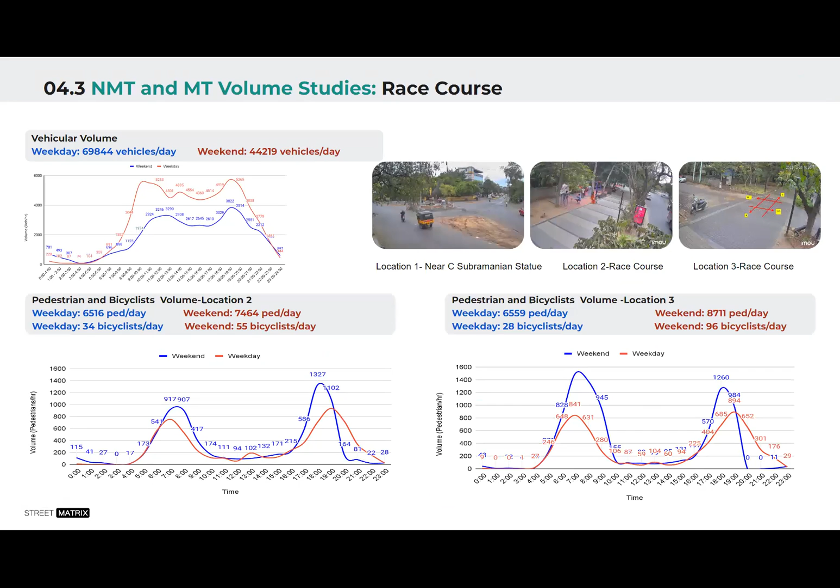That's the basic thing which hints at how you design your allocation plan. And this was a place where we could even see 8,000 people walking on the sidewalks per day, so that was a huge place where priority is obviously for the NMT.

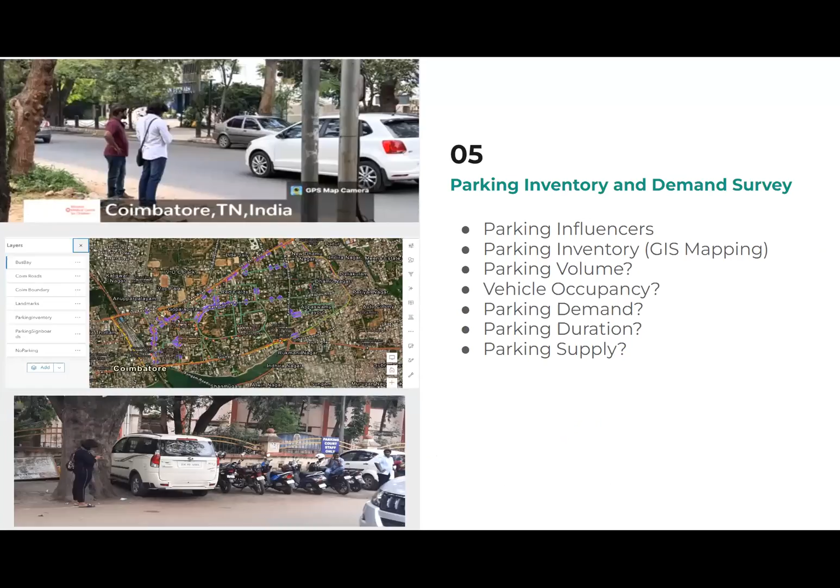Then we did a detailed parking survey analysis. We mapped the influencers, major parking influencers which attract parking. We also studied its supply, and thanks to the government officials, they often issued notices to some of the places where if too much demand is there and they don't have parking management space, they started having discussions with them.

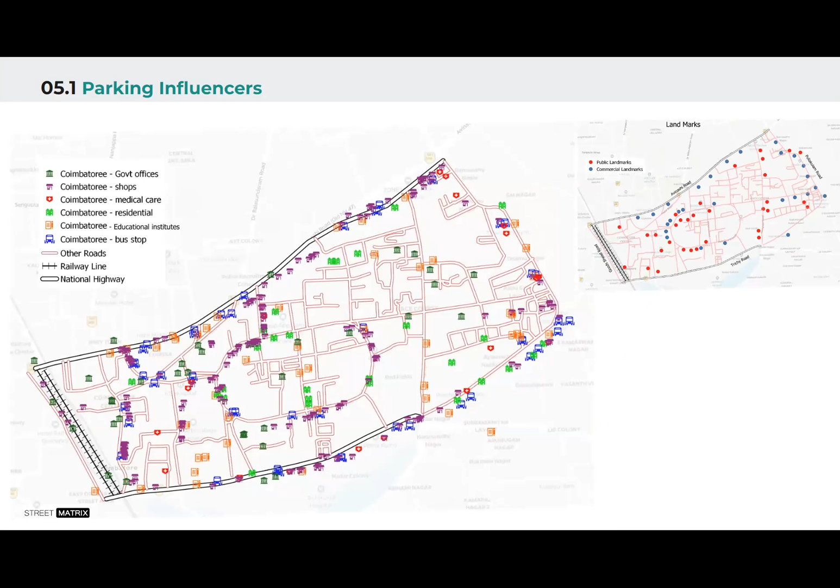We identified some private places where we can have a collaboration for private parking and other things. So many other lateral points also came up for leveraging the space for parking.

This shows our detailed demand assessment for parking in terms of numbers, duration, occupancy, and how it has been changing, which overall gave us an idea that whatever the 4 square kilometer area we studied had a count of 11,000 vehicles. And in that 11,000 vehicles, how each road is able to produce the demand, that has also been assessed.

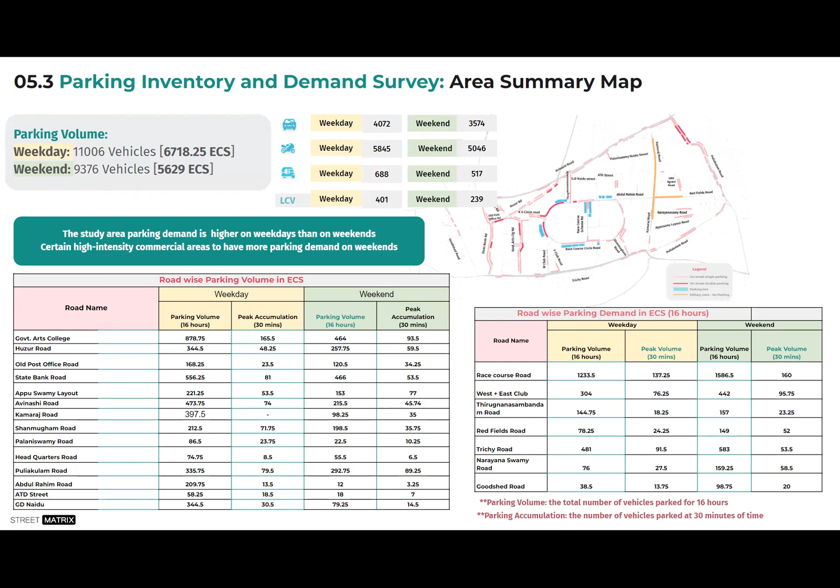From that, we assessed the study area as a whole to categorize it based on its density. We categorized the entire neighborhood into 3 different zones: high density, medium dense, and low dense. This gives us an idea about how to design your space.

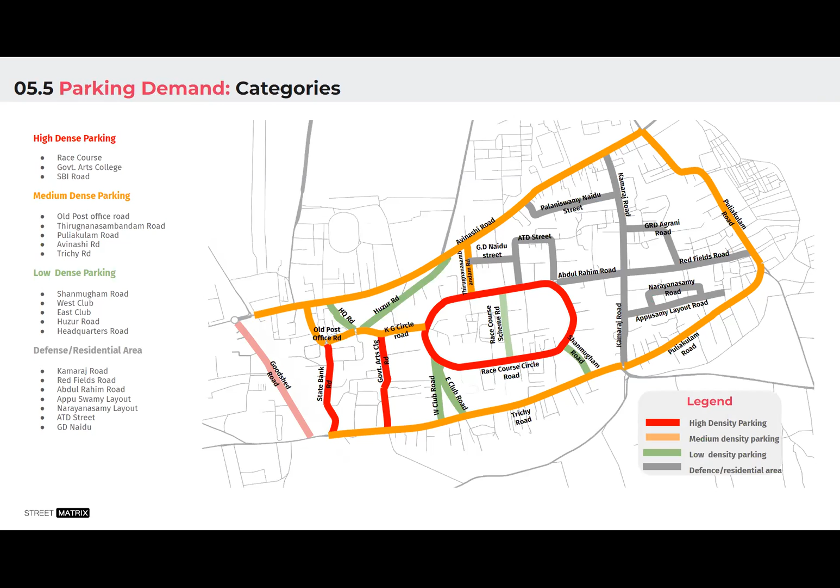Then we laid out our planning principles, which are the roads prioritized for NMT action plans. So all the roads we supported with the NMT action plan, and then supported with the parking, how to provide it, and to what extent the spaces can be given.

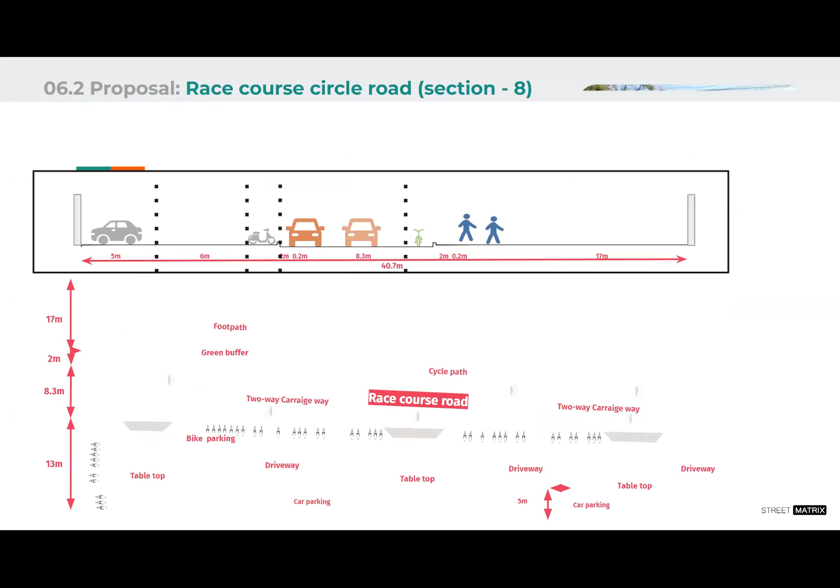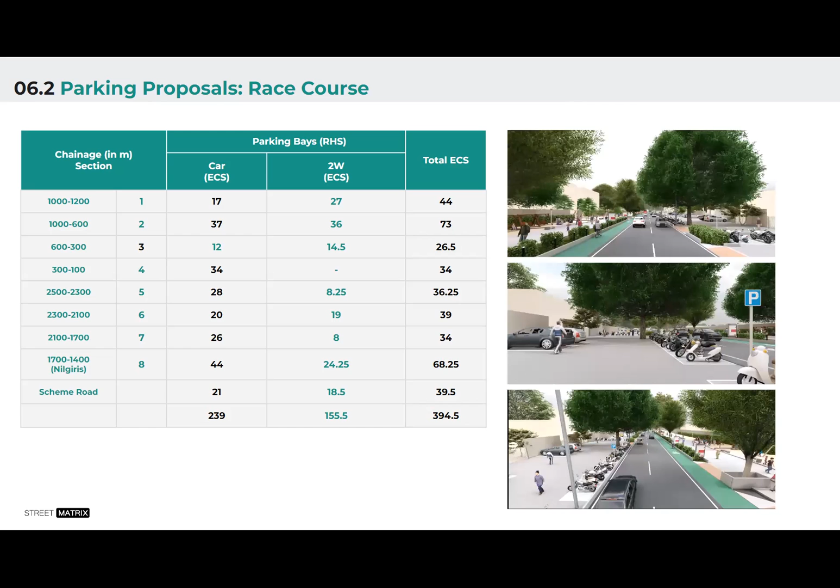And finally, we laid out our plan to the existing road street network. This is how we helped the people to look into it. I'm showing a 3D visual of how, with the parking, this street has to be performed. This is what is the way we have done.

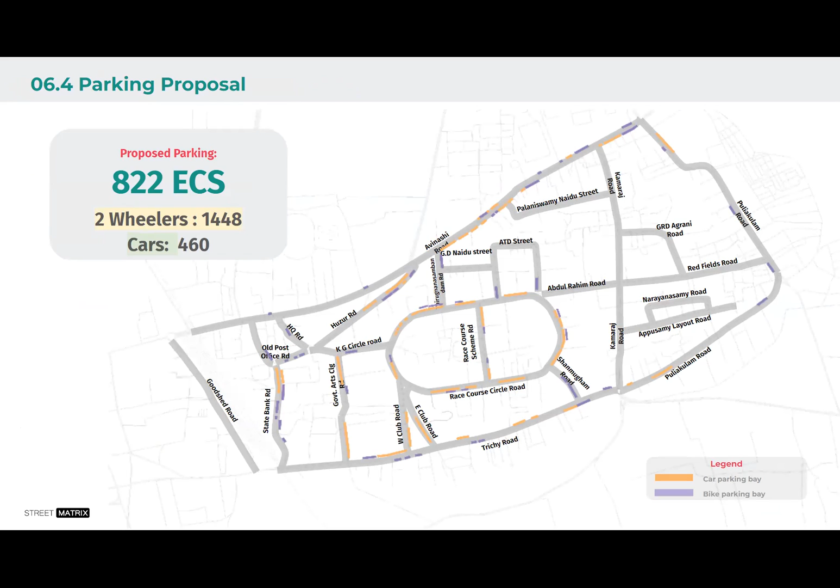So I'll be showing you the final one, what we have seen as the demand and what we have proposed as parking. This is the core point I would like to say: it's not that we completely meet the demand when we do an area level management plan. We have to strategically think about how to address this, provide optimal supply, and provide for all the modes, so that it is not just favoring only two-wheelers or cars. And finally, with the right pricing, the management will come in.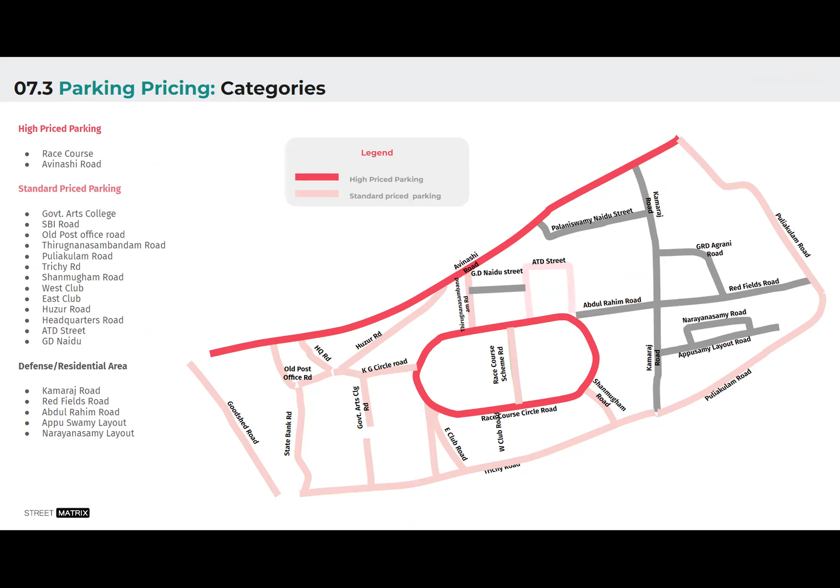So you need all these economic instruments, the space instrument, everything acted together in order to complete a parking management action plan. We did an opinion survey on pricing to understand from the people, and finally gave reference for what pricing can be kept for the roads. With that, we introduced differential pricing based on the land use and economic activities of the streets. This is the final action plan. So this is what is from my end.

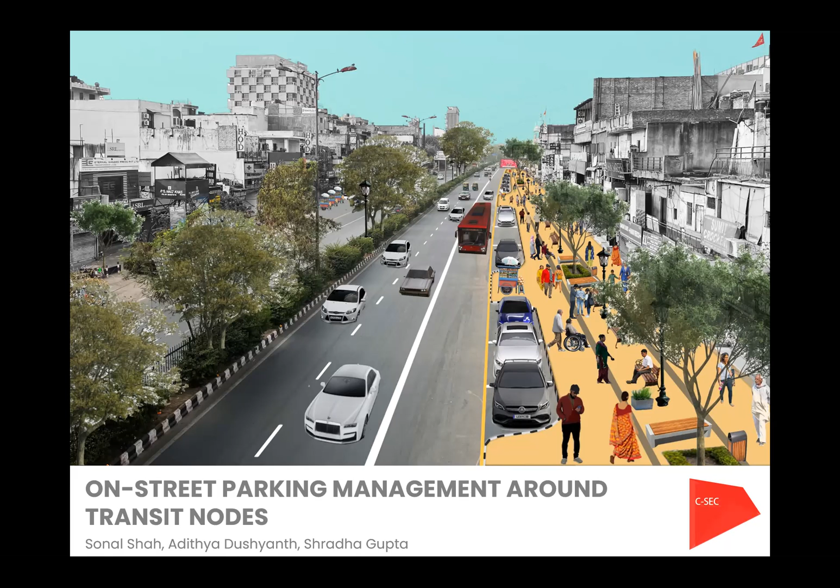My colleague Adithya is also on this call. We are part of the Sustainable Mobility Network, like Sensing Local, and we started this journey in 2021, where our objective was to demonstrate how the Delhi parking management rules, which were adopted in 2019, could be implemented. There were about 16 residential parking area plans prepared by MCD, which were against the principles of the Delhi parking rules. So through the presentation, you will see the principles we've tried to follow.

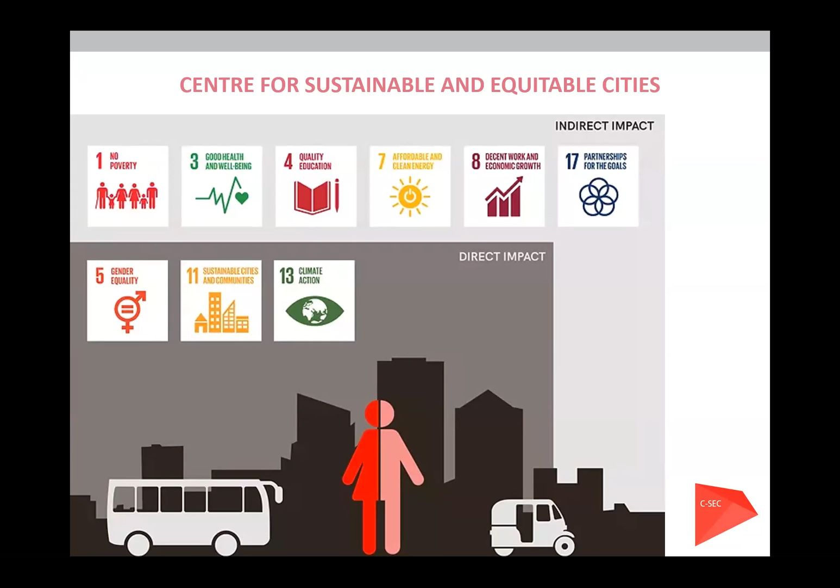Just to introduce ourselves, we are from the Center for Sustainable and Equitable Cities, looking at three major SDGs: 5, 11, and 13. We are part of the Delhi Sustainable Mobility Network, and some of the partners are here. This is convened by Purpose and funded by the Urban Mobility Innovation Fund.

One of the things that shaped our approach when we began to think about parking and parking management is that when we look at India, we have about 900 kilometers plus of metro rail systems, 22 operational and under-construction metro rail systems, with another 5 approved. We also have about 300 kilometers of bus rapid transit systems, 12 operational BRTs, and operational urban public buses.

And yet what we find is that different initiatives kind of exist separately. We have a metro rail system, and then a city will have a BRT, and then buses, and then we think about an NMT network plan, and the city also has TOD, and we are thinking about last mile connectivity.

While all of these initiatives are being proposed, one of the big things we are seeing currently, based on some data from our mass rapid transit systems, is that we are still not able to achieve projected ridership. There are many reasons for it, and we can argue about that. Over a period of 10 years, the compound annual growth rate of registered motor vehicles increased by 10%.

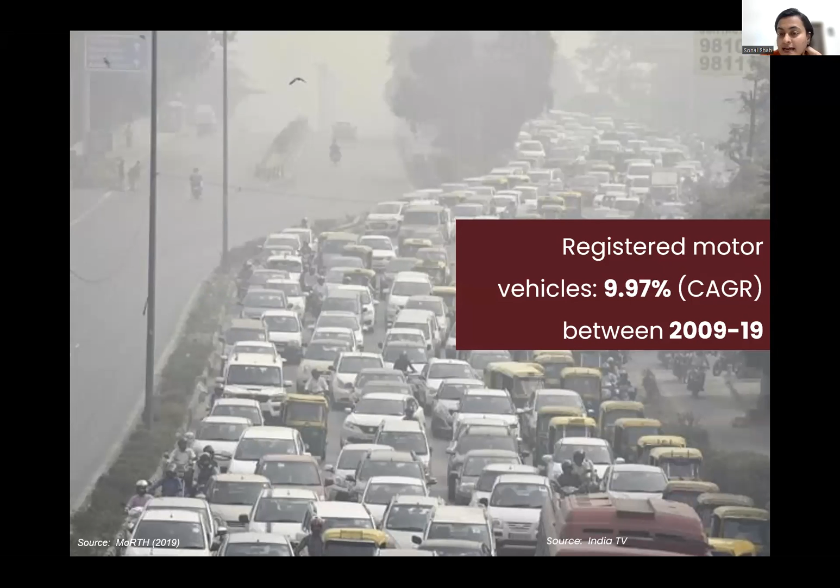When we looked at Delhi, it has the largest metro rail network in the country, and as of 2019-20, its ridership was 79% of projected ridership. We still see that vehicle emissions contribute to more than 55% of PM2.5 emissions. The Delhi government has so far built or redesigned 40 kilometers of streets in different parts of the city.

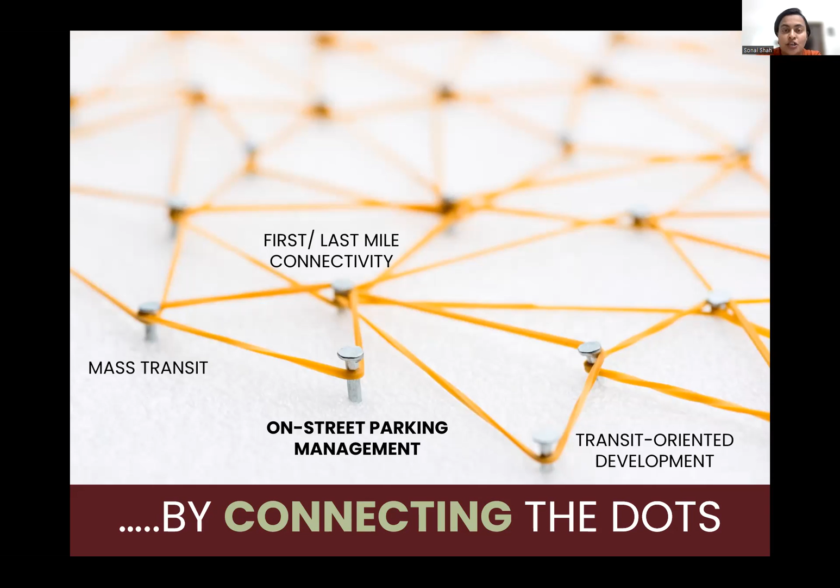And we were really beginning to think about how we could shift people's travel to mass transit and really begin to think about on-street parking management as a tool within the overall mobility system, so that it would connect the dots. How do we connect the supply infrastructure while considering demand management? This is how we situated our approach to demonstrate the implementation of the Delhi parking rules.

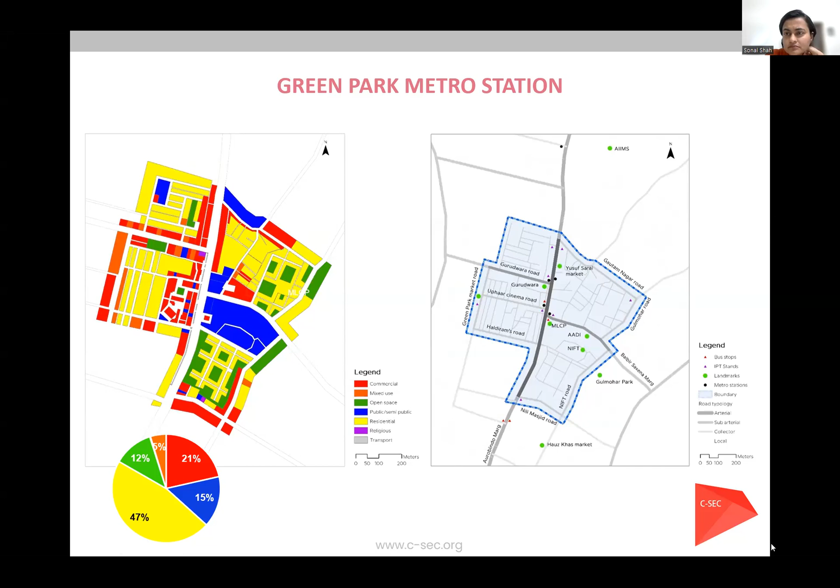Okay, so what was our methodology? The first thing we looked at was a literature review of the parking policies nationally in Delhi, the master plan of Delhi, and good practices in India and globally, some of which has already been shared by Reashma.

And then we began to look at the existing situation analysis. Because we were focusing on a metro rail station, it became very important for us to understand how metro rail users were using the street space. We did a survey with the people who were parking within this neighborhood, primarily 2-wheeler and 4-wheeler users, motorized vehicles, and we did an assessment of the pedestrian walking infrastructure as well.

We did a very detailed analysis of parking behavior, especially through number plate surveys, as well as parking counts. The number plate surveys were done for some of the major roads in the neighborhood, which were feeder roads to the metro station, as well as in and out counts through multi-level and surface parking lots. This then helped us analyze the ground data and come up with a set of recommendations which were used to have stakeholder consultations. And I'll also describe the journey of implementation for us as well.

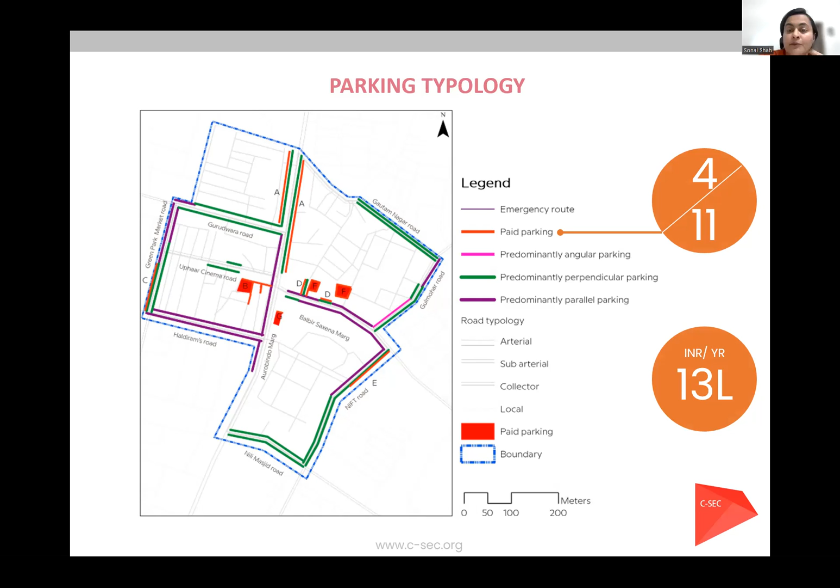So we looked at paid stretches, and we also looked at the orientation of parking, whether it was parallel, perpendicular, predominantly angular, and so on.

Then when we began to do a survey of the metro users, we found that the mode of access and egress to the metro station: 70% of the users walked to the metro station, and often they were walking as far as 1.2 kilometers. This was then followed by auto rickshaws, which could be both shared as well as individual. So these 2 were the main modes of transport to the metro rail station.

But when we started talking to the personal motor vehicle users, we found that it was very convenient to park on the streets in the vicinity of a metro rail station. Some 87% of the respondents spent less than 2 minutes finding a place to park, and another 74% parked within 100 meters distance of their destination.

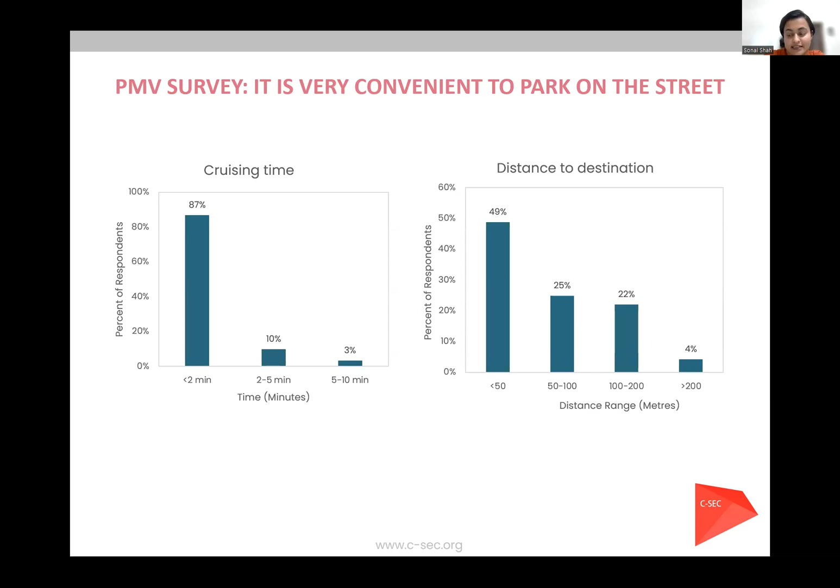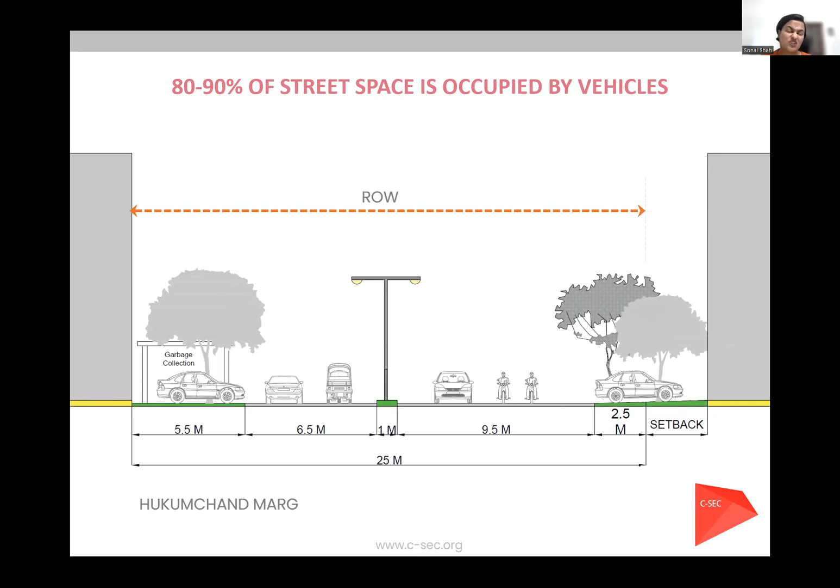And Hukumchand Marg would be described as a collector street in the street hierarchy function. So we did that for all the major roads in the area in order to understand the road space allocation between the carriageway, parking, and footpaths.

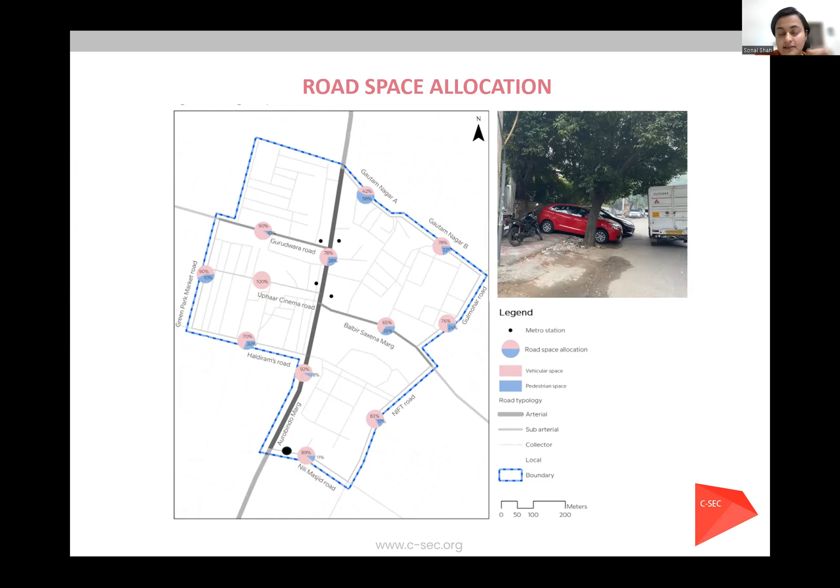So you see one photograph where there is a footpath, but the vehicles have just parked perpendicularly. And this photograph is actually very, very common in this area as well.

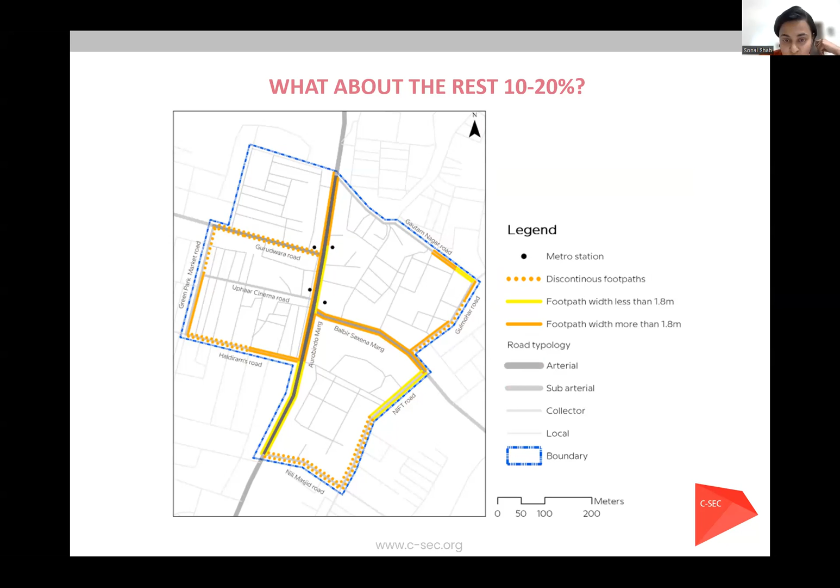Now, what about the rest of the 10 to 20%? So similarly to the study done by Sensing Local, we looked at IRC 103 guidelines for pedestrian facilities, which recommend a minimum of 1.8 meters. I believe that has since changed to 2, but we took this at the time and began to map where we found this kind of walking infrastructure or network, and where it was discontinuous or less than 1.8.

So this is the example. We had stretches where there were no footpaths, but then what about stretches that had footpaths, and how did parking impact the availability of street space for pedestrian infrastructure?

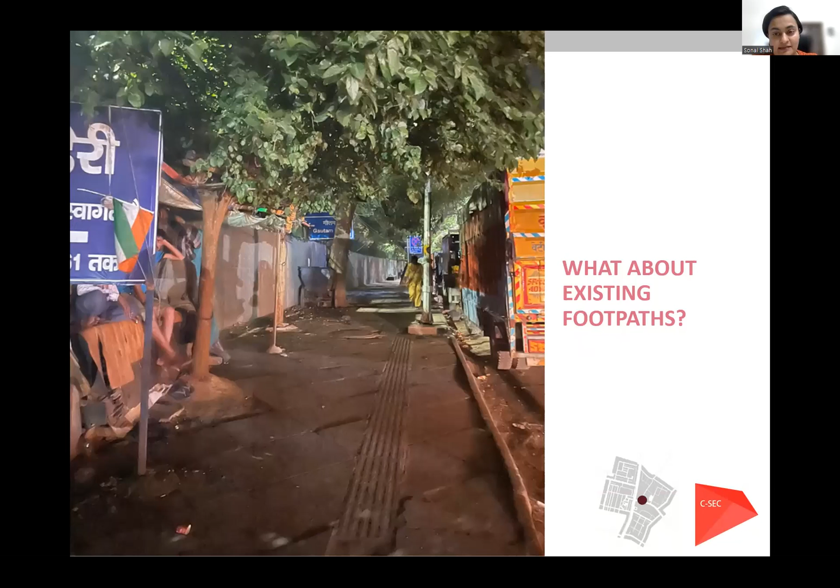We have some data around parking accumulation, and I'll try to show some of what we found. Very interestingly, I noticed both from Abhijit and Reashma's presentations about short-term parking. We found that about 82% of existing demand was less than 2 hours, and 18% of on-street parking was more than 2 hours.

Then we began to assess both the occupancy of on-street versus off-street. Like I mentioned, we do have a multi-level car park in the vicinity. Our in-and-out counts showed that the MLCP occupancy was only 32%, so extremely underutilized. But when you look at on-street parking occupancy, sometimes you'll find it is overutilized as well.